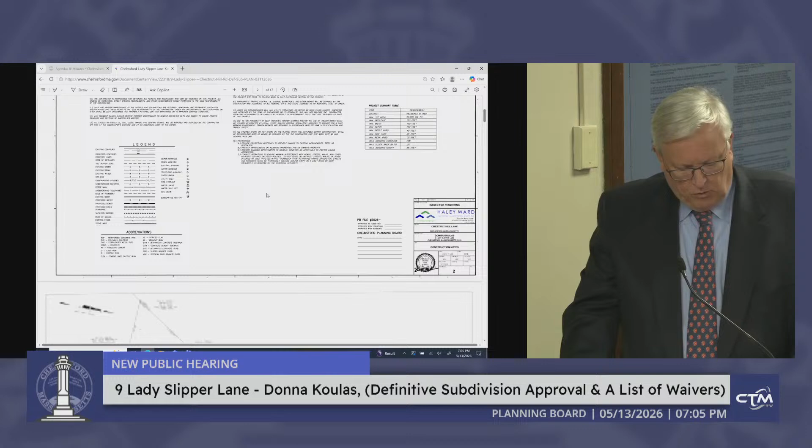You'll probably see from the plans put up on the screen as we go through, this subdivision, the two lots meet, and the proposed houses will meet all of the setback requirements, all the dimensional requirements of the zoning bylaw. So frontage, front yard setback, rear, side yards, height, floor area ratio, all of these are satisfied. So far, so good. This is pretty much a vanilla subdivision, to be honest.

Each lot's going to be served by a septic system. Tests have been done. Brian Malisi, who's the project engineer, can address some of those issues when he comes to speak. I also have Anthony G. here, who is our wetland scientist with Goddard, and he has coordinated all the efforts associated with the Concom hearings and findings that they need to make.

We are not seeking any special permits, so it's a rather limited list of waivers that we're seeking, most of which deal with the street. Basically, elimination of curbs, elimination of sidewalks, reduced width to 22 feet for Chestnut Hill Lane, given that there are only going to be two homes, really two homes and an ADU, that are going to be using that lane on a consistent basis. It's as rural a road as you could possibly imagine.

We had already spoken with or obtained feedback from some of the safety departments. My understanding, police has not sent a letter in yet, but we're not anticipating any kind of issues there. The fire department, we did expect and did receive a letter for their comments, and they are supportive of the gravel road approach as long as it meets their load requirements, which they say it does. So that's another benefit. The gravel road's going to be the better choice in this instance, because you'll hear a lot of people being concerned about drainage, and the gravel road allows for natural drainage versus an impervious area. So we're dealing with two lots, 900 linear feet. I just ask that you keep that in mind.

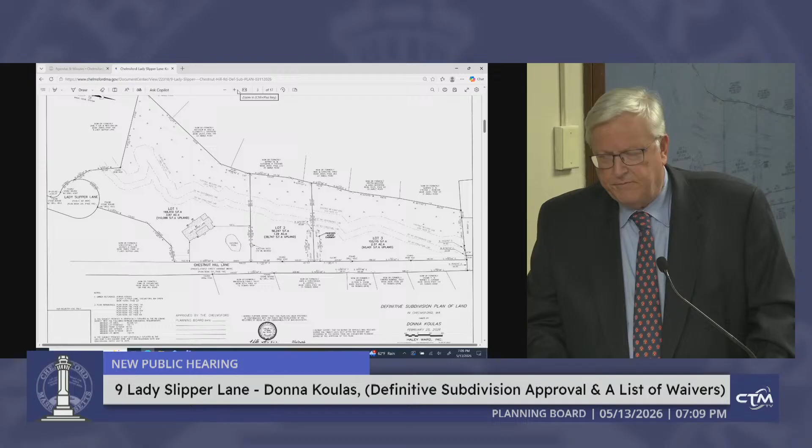That homeowners trust will certainly address the issues of any of the fire department's concerns or police department as well, because it's common that a homeowners association does just that. It makes sure things are safe. You'll see on the plans there's a proposed T turnaround that the fire department will be using, and they found that to be more than acceptable given the width of it.

We're not suggesting that Chestnut Hill Lane become a full street, meaning a thoroughfare from one end of Cantor all the way out to Pine Hill Road. The reason is we don't want it to become a cut-through. It just wouldn't be safe, especially when you get out to Pine Hill Road. Your sight distances vanish, literally, when you're coming out. If you were looking left or right, you could have a serious problem. So by doing that—yes, I'm sorry.

So can you just show me on the map where this is? I think I know where Pine Hill is—Pine Hill's way down here. So Chestnut Hill Lane starts at Cantor, goes all the way through, continues, and would wiggle its way out to Pine Hill Road. In fact, there's a fence there now. So where's the gravel road going to be? This was just being highlighted. So by doing it this way, we have basically a dead end with a T turnaround. So you're going to have a dead end there. Exactly, we're not going to improve it past that. For safety reasons, it makes the most sense. Okay, thank you for orienting me, because I was thinking a totally different direction.

Let me keep going through here. The Draft Homeowners Association probably should not have to address sidewalks. I hope you wouldn't ask for a sidewalk on a 2-lot subdivision. Anything's possible, but I hope not.

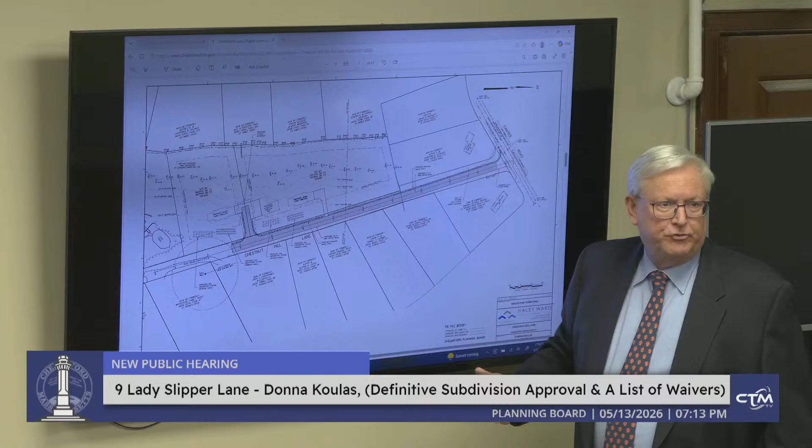One of the questions was, does the applicant have the right to use the entire length of Chestnut Hill Lane? Because one of the abutters made a comment saying, well, you don't own this apron. That's true, we do not own the apron. We own from my client's property line to the midpoint of this, because it's a paper street essentially. That's in terms of actual fee ownership.

But the right to use this entire length, not just here, but all the way through, everybody that abuts that has the right to use it. There's no question about it under Massachusetts law. That's the whole purpose. It's all addressed in the derelict fee statute. I've cited it, I've given you the case law on that. I think most of you are very familiar with that already from prior hearings.

But I want to make it clear that we have the right not only to use that for access and for frontage, but under the case law I've submitted, we have the right to install all the utilities through it, electric, gas, cable, water, you name it. We can do all that.

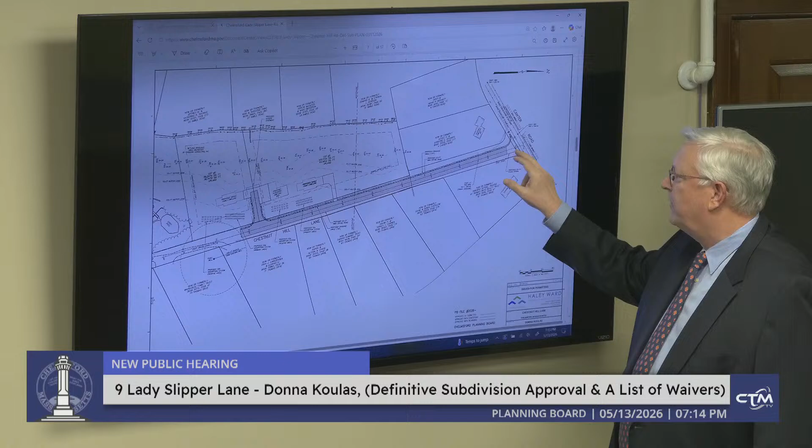And it goes even further, because one person has expressed concern that they own a tree that's somewhere between Cantor and here, somewhere in the middle of this lane. Under the case law, if the tree is in the lane, it really belongs to everybody, and we have the right to remove it because it's defeating the purpose of what that lane is.

The lane is designed for passage. It's not designed to grow trees. So under the case law, we have a right to cut shrubs, trees, plants, anything that's in there, if we're improving it for purposes of using it as access, which everybody can use along that way. And I've cited the case law on that. It's a Shapiro case from 1987.

So we have the right to use it for travel rights. We have the right to basically use it, anything in common for access and travel. We are allowed to build anything within that particular lane as long as it's not a permanent structure on top of it that prevents anybody else from using it. We're just making it better. And there's a presumption to that effect.

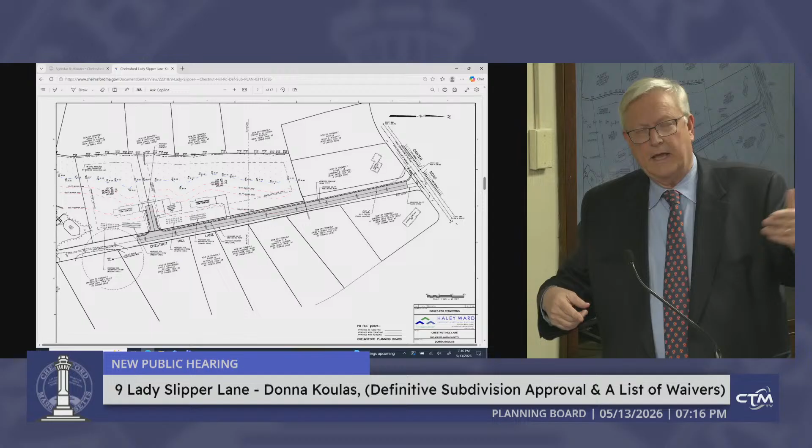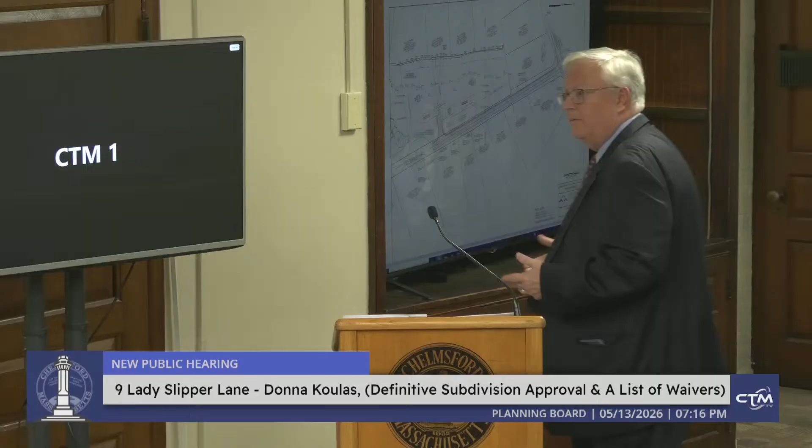Some people wanted to know, do we have the legal right to rely on this road for access? The case law says the subdivision plans approved by previous boards in Chelmsford, starting in 1950, then 1999, then 2001 or 2002, there are at least 3 subdivision plans of record, and all of them define my client's property rights by defining the western boundary of Chestnut Hill Lane. That is actually in the deed description. So because of that, it's an easement by implication, it's automatic. It's not gray, it's black and white, which is great. It makes life easier for all of us.

Anyone has the right to use the private way and make reasonable repairs and improvements. I've cited the case law on that. Such reasonable repairs include paving the easement and other improvements consistent with principles of safety, and that's exactly what we're talking about. Clearing limbs from a roadway, smoothing the surface, placing gravel, or even paving a road have all been deemed reasonable repairs necessary for the enjoyment of the easement. So we have the right to do that, based on a 1981 case called Glenn versus Poole.

The installation of septic systems has been deemed permissible pursuant to the statute as well. There are 2 theories: we have an easement by estoppel or an easement by implication. Either way, we have the right to use the land. My clients don't have to own the entirety of the land, of the lane.

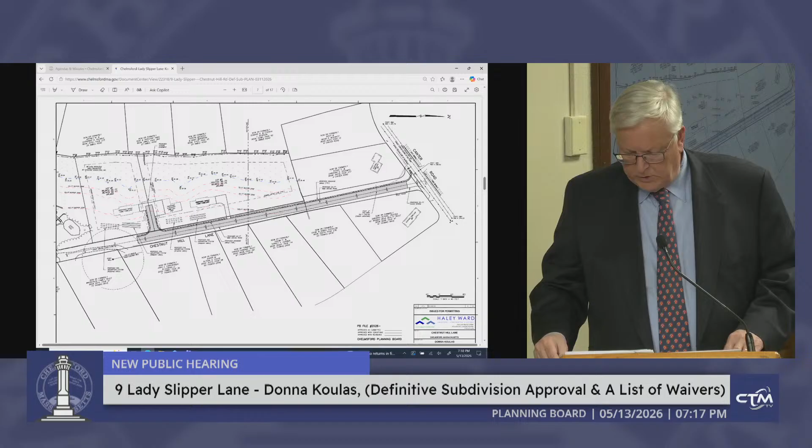Some people were concerned about traffic. Respectfully, not making it a throughway should solve that problem, and that's what we've always proposed. The source deed goes from 1950, from Mr. Sheehan to Charles Koulas, Donna's father, and that property has been further subdivided over the years. Lady Slipper Lane's entire subdivision was part of this original tract.

Some people were concerned about the width of the proposed roadways. The fire department has already addressed this and says they believe what's being proposed is more than adequate. They just want to make sure that whatever type of gravel road we put in meets the fire department specs, which we can. Brian can address that more particularly.

I could be wrong, but I think this is relatively straightforward. I'm not going to get into vernal pool theories or any Concom issues. That discussion belongs at Concom, not before this board, in my opinion. I'll refrain from getting into that too deeply.

I think we're going to have established that we meet all the criteria for a subdivision plan. The waivers are very minimal. I think there's going to be some discussion by your board about the use of gravel.

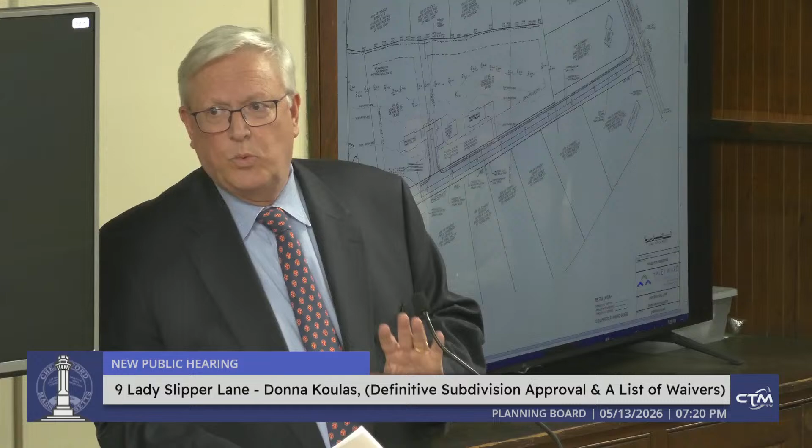We're going to be happy to address any concerns you have. I'd like to ask Brian Malisi to address the technical components of the plan, and then Anthony can be here to answer any questions you have about wetland issues that might come up during conversation with the abutters. Brian?

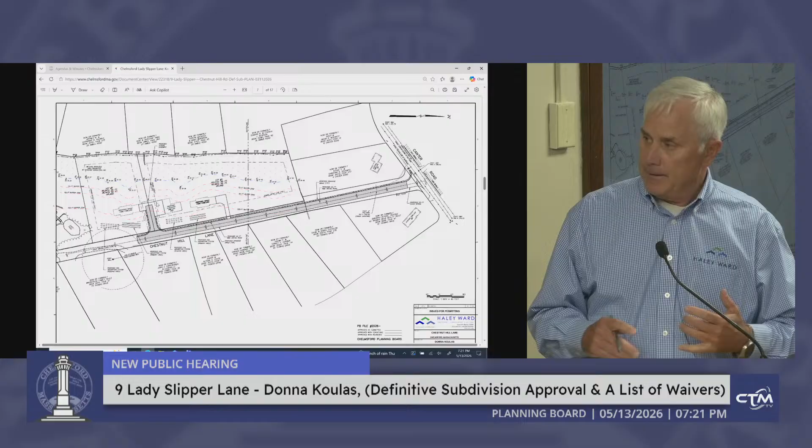I believe the sewer moratorium is still in place in the town of Chelmsford, so these lots will have to be serviced by on-site septic systems. We did perform the soil testing required for the septic systems a little while ago. The testing was witnessed by an agent of the Board of Health, so it was all done on the up and up, and we showed the locations of the testing. The results of the testing are on the plans in one of the back sheets. We also showed the layout of the systems.

I think I read a comment where the 4 septic systems are going to cause all sorts of effluent problems. What I did want to show is the primary area and the reserve area. Title V requires us to show a reserve area. That area does not get constructed until the primary area were to fail or something were to go wrong, but we need to show that the lots can accommodate a reserve area.

Within that roadway, we're going to bring electric, we're going to bring gas. Everything will be below grade. There won't be any poles around.

The proposed stormwater system that we've provided for the gravel roadway utilizes one of the low-impact development techniques that are floated around in the town of Chelmsford. It's a gravel roadway, which reduces the amount of impervious area. It still needs to be a wearing surface that the fire department can travel on, emergency vehicles as well as the vehicles that are going to be serviced, going to and from the homes.

I forget the number right off the top of my head, but it's within the fire department comment letter that it just needs to have a bearing capacity of X amount in order to accommodate their largest or heaviest vehicle. Again, during the construction of the roadway, that can be fairly simply ascertained with some compaction testing. During that, reports can be given to the town, the fire department, whoever else would like to see that.

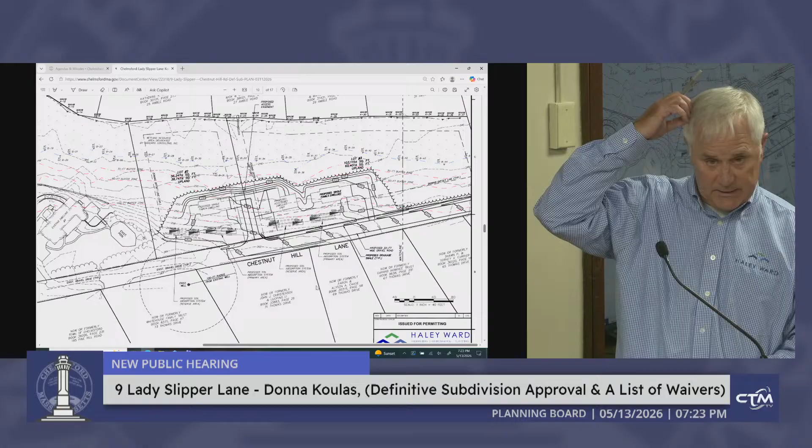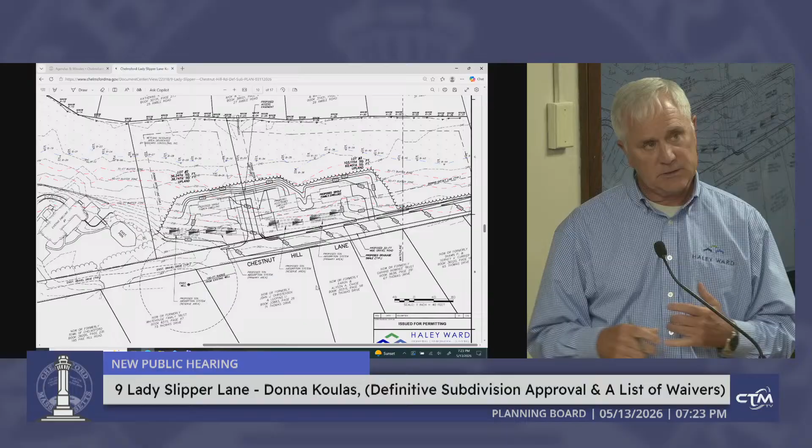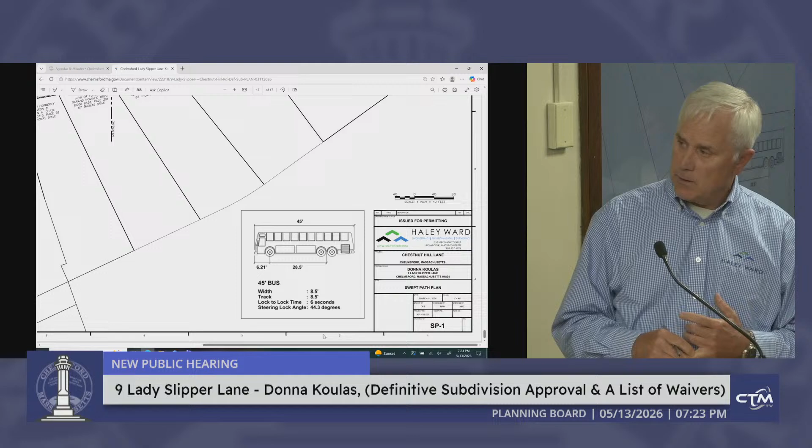I think the counsel said that we terminate the roadway with a T turnaround. The dimensions of that T turnaround are as prescribed in the subdivision regulations. I think the very last sheet of the subdivision plans, we show a swept path plan. You guys are very familiar with those. The fire department typically asks for one on every single project. We show how he gets in and out of Canter Road, as well as turns around using that T turnaround.

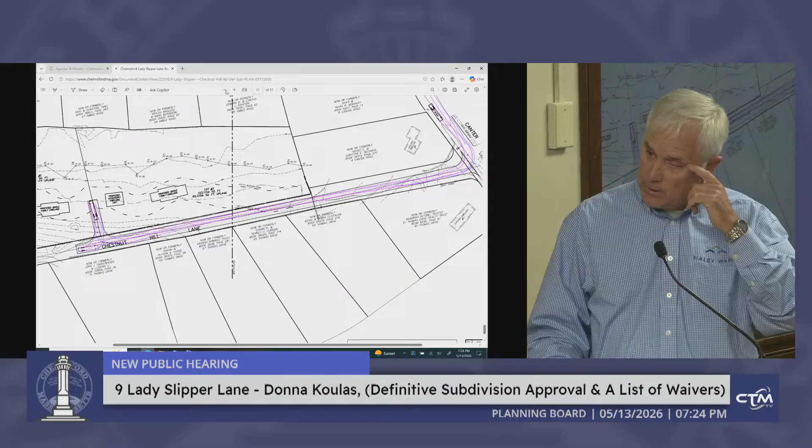I should add that we do have a paved apron coming off of Canter Road, just as vehicles such as a fire truck, if they're going to make those maneuvers, we just want a little bit more of a wearing surface there.

It's not on these plans quite yet. We have a whole host of revisions that we're going to be making, not just after input received from you guys this evening, but from the Conservation Commission. One of the things that we're bandying about is providing a paver, pervious paver type of driveway for both the driveways to the houses as well as the turnaround to provide a little bit more of a wearing surface, but not constitute a complete paved way that would add impervious area to this.

So for the stormwater, if you notice some of the grading plans and some of the details, the grading of the roadway is what we call super elevated, which is just pitched to one side, such that the stormwater runoff from the roadway will pitch to the west or to our side of the property and be intercepted by an infiltration trench in order to intercept that stormwater runoff and infiltrate it back into the ground.

We did provide a profile of the proposed roadway. We try to stay very, very close to the existing roadway in order to not create any large cuts and fills and have a lot of earthwork that has to be entertained for the roadway itself.

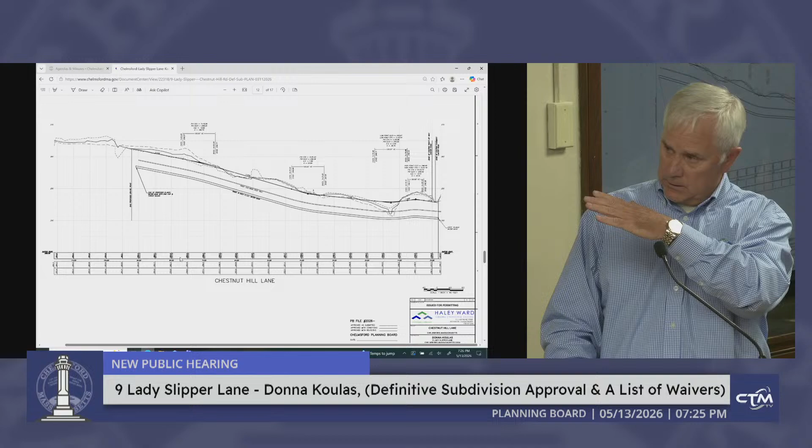From a cut and fill analysis, for the roadway itself, we have 330 yards of cut, so that's fairly minor. There's a little bit more material that needs to be imported into the site for the development of the two lots. They are on a slope, and once we put the septic systems in, put the foundations in, there is going to be some material required to kind of grade the lots and make them habitable.

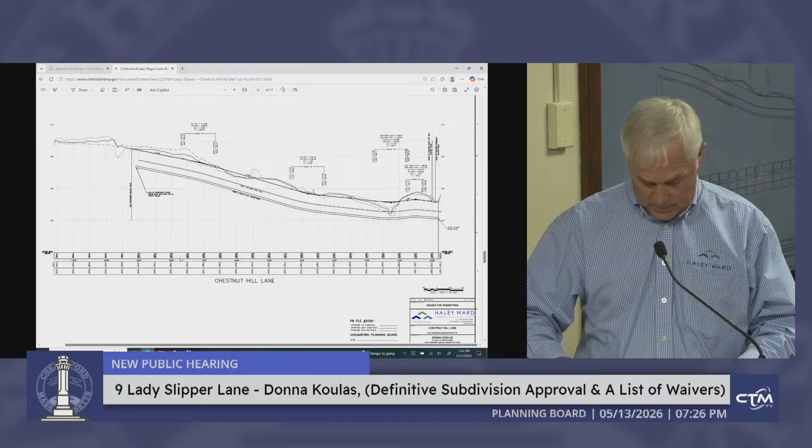I know this is not a Conservation Commission meeting, but you'll see on the plans where the wetlands are located and the appropriate buffer zones from that. One of the reasons for the lot cut up and house placements is to meet Conservation Commission criteria of staying out of the 30-foot no-touch zone, keeping structures at least a minimum of 50 feet away from those wetlands, and the septic systems 100 feet away.

So that's where the placement of the houses came from. We put in desirable footprints for the two lots. We wanted to show a real grading plan, both to this board and the Conservation Commission, to get an idea of what would be going on.

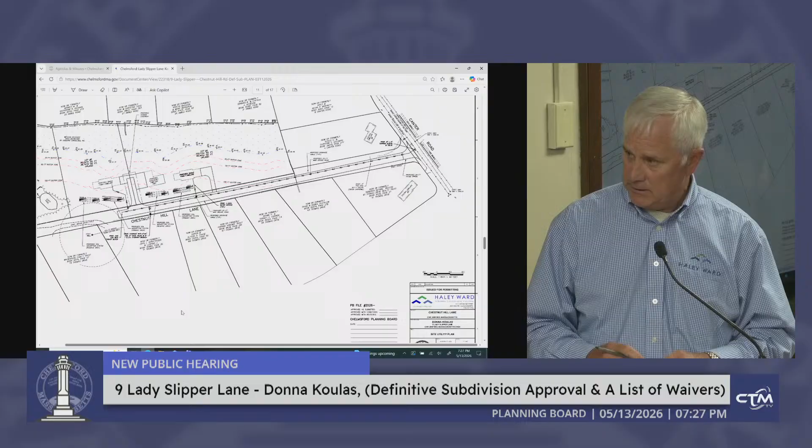I can dive into septic system design, I love that kind of stuff, but you guys probably don't want to hear that. I will say both houses currently are either going to be 3 or 4 bedroom homes. However, we've designed the systems for 5 bedrooms, mostly because of the ADU. The ADU has the right to tie into the proposed septic system, and it'll accommodate that extra bedroom. So these septic systems will be fully compliant.

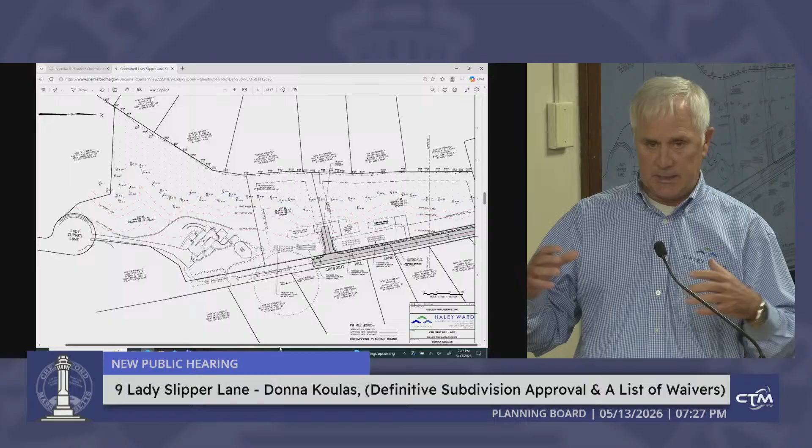Again, following some of the input from this board and from the Conservation Commission, we're ready to pull those designs and submit them to the Board of Health. We have not done that yet, just in case anything gets revised and twisted around. But there's that hierarchy of submittals and permitting. I know I was probably very quick and probably forgot a few things, but I'm sure it'll be flushed out during questions. Thank you for your time.

I'll just wait. If the board has any questions for me, I'm here to answer them. Considering it's not a Conservation Commission hearing, I'll leave it to you guys if you have any questions related to wetlands. Okay, thank you.

All right, Marcy, we have department letters. Sure. All right, so our first one is from the Board of Health.

Dear members of the Planning Board, this letter is submitted in reference to the proposed development project located at 9 Lady Slipper Lane. The applicant is requesting approval for a 3-lot definitive subdivision, which proposes the establishment of a private way to serve 2 newly created single-family residential lots. One of the proposed lots would also include an accessory dwelling unit. If the proposed development is unable to connect to town sanitary sewer systems, the development would necessitate the installation of on-site septic systems. Any such system must be designed and constructed in full compliance with the requirements of Title V of the State Environmental Code pursuant to 310 CMR 15 and successfully complete the Department of Health's application review and inspection process. Respectfully submitted, Donna Greenwood.

We have one from the Chelmsford Water District. Dear members of the Planning Board, the Chelmsford Water District has no concerns with the proposed project at the location. If this project is approved, a representative should contact the district to obtain our rules and regulations, as well as our specifications and fees. Sincerely, Brendan Cantor.

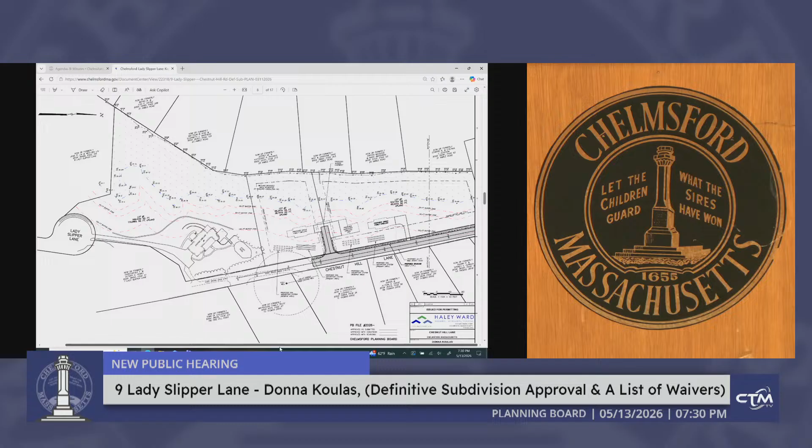This one is from the Department of Public Works, from Sheila Joyce. It says the engineering department has performed a review of the definitive subdivision application submitted by the applicant. The submissions were reviewed for appropriateness and method of accuracy, as well as for compliance with the Town of Chelmsford's Stormwater Bylaw, Town of Chelmsford Stormwater Management Regulation, and Division 3 Sewer Capacity and Connections Restrictions. The attached documents entitled 9 Lady Slipper Lane, Chestnut Hill Road Definitive Subdivision Application Packet, the engineering plans entitled Definitive Subdivision Plans for Chestnut Hill Lane in Chelmsford, Mass., March of 2026, and the attached 9 Lady Slipper Lane, Chestnut Hill Road Definitive Subdivision Waiver Requested were reviewed. Clarification is requested by the DPW regarding ownership and rights of the private paper street, Chestnut Hill Lane. Site plan review shows outstanding DPW engineering issues that were not addressed.

Applicant to confirm HOA and procedures for trash disposal and pickup. If applicable, provisions for the enclosed dumpster pad and dumpster should be depicted upon the plan set. Long-term and perpetual care of the dumpster, including emptying and enclosure, will be the responsibility of the property owner. Locations and procedures for snow storage and plowing of Chestnut Hill Lane should be depicted on the plans.

During construction, care should be taken to maintain separation of at least 10 feet horizontally from the edge of the sewer services to the edge of the water services. Where a horizontal separation of 10 feet is not practical, both services can be installed closer to each other, but the water service must be 18 inches higher than the sewer services per DEP standards. See Massachusetts Water Laws, Chapter 9, Section 9.8.

All existing and/or proposed utilities should be clearly and accurately labeled with size, materials, existing and proposed rims, inverts, etc. on the drawings, reflecting the most updated utility connections and sizing. Confirm location of the proposed 1-inch water service to the accessory dwelling unit. Cut and fill calculations shall be submitted for review.

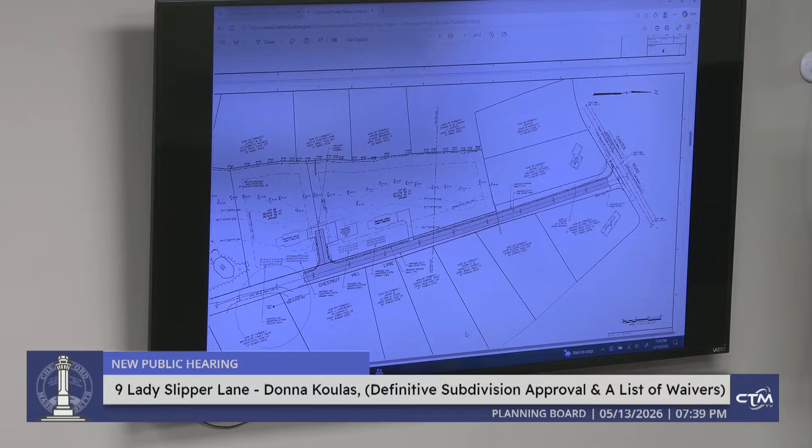Joel? Yeah, sort of along that same line, so this paper road, which is between Cantor and Pine Hill Road - yes, understand - and that when you look at the GIS, it shows a gravel driveway. It looks like some sort of use of that paper road up to about the point where it's indicated on the map, where on the left, it makes some reference to a gravel road or something like that. So if that's accessible right now, then the only thing that makes it inaccessible is the fact that what you're planning to turn into road, because that's the part that's wooded and stuff that has to be cleared out, is what I understood you to be saying.

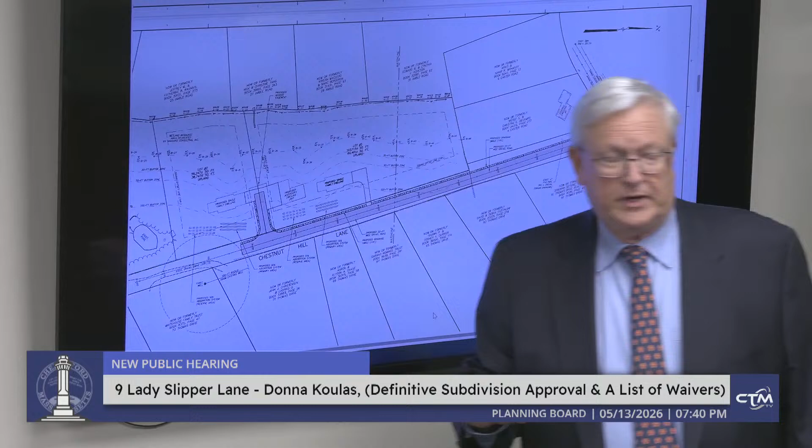It's totally unimproved right now. Yeah, it's completely unimproved, so it's impassable right now. And this road that continues all the way out is not in particularly great shape. My recollection, and I can be corrected by others, but the only one that I am aware used that on a routine manner was Mr. Parley, when he originally owned this.

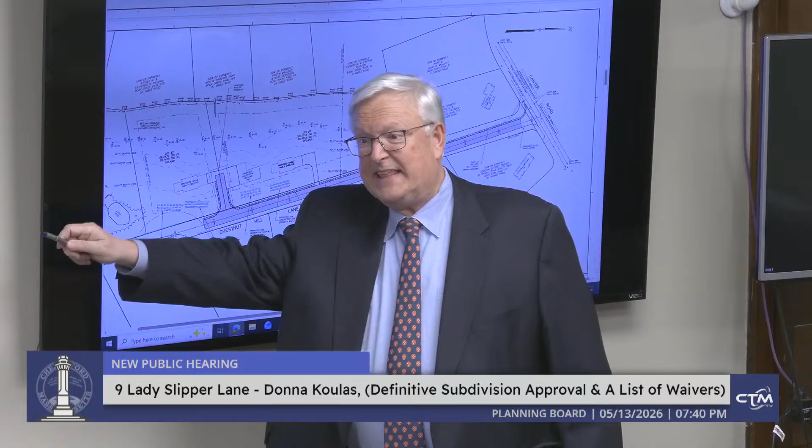There was a dispute back in 1999 which I was involved in. He was using this to retain his rights. But to my knowledge, it's very rare that anybody comes through, and I think there's a gate at the end out on Pine Hill Road that prevents people from going all the way through.

So it's not a throughway whatsoever. Right, although technically somebody could remove it if they wanted access at the other end. Yeah, well, so any one of the people could want to develop it. Okay, but one of the questions I have is...

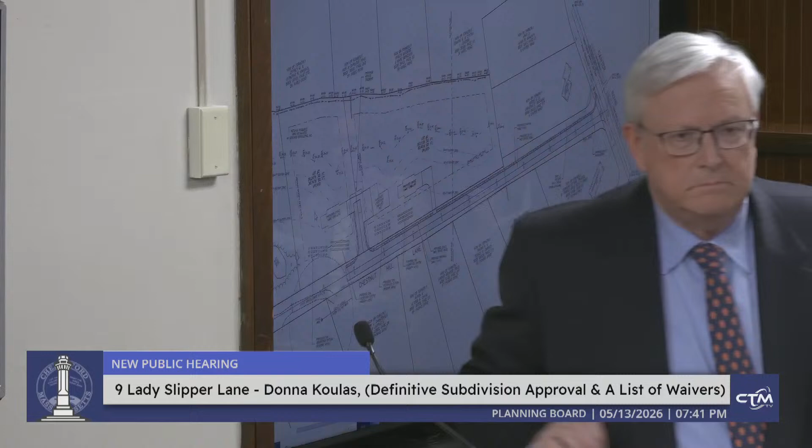So we're subdividing, we're creating 2 new lots, correct? So on one lot there is a principal dwelling unit, that's lot 2. This is the existing 9 Lady Slipper Lane, the existing dwelling with a long driveway in. This is all the one lot. So now we're creating this lot and that lot, correct, the 2 houses with the accessory dwelling.

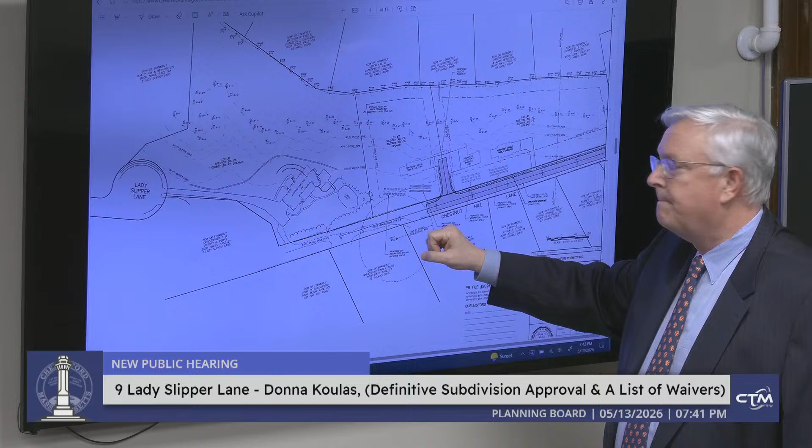So lot 2, does that have a principal dwelling unit proposed to be developed on it? Yes, this will be it. So there is a principal dwelling unit proposed for lot 2. So theoretically, one could add an ADU to that under the current law, correct? Sure, it could.

Then lot 3 is where the ADU is being proposed. So the ADU is being proposed on that lot, but they share a common drive. And that is the principal dwelling unit for that lot, and then there's the ADU, and the principal dwelling unit for that other lot is that one there.

Doesn't the ADU have to share the driveway that goes down to this street? This will be the road and that'll be the driveway for the T turnaround, allowing entry into this house or to the ADU. This will have its own drive. Well, that's what I was just going to get at.

Aren't ADUs supposed to share the driveway of the principal dwelling unit on the lot on which it's located? Yes, and it will. No, it's going to share the driveway with lot 2. Oh, I see what you're saying. You're saying should it have its own? It should be sharing the driveway with lot 3. With lot 3, I understand. Yeah, okay.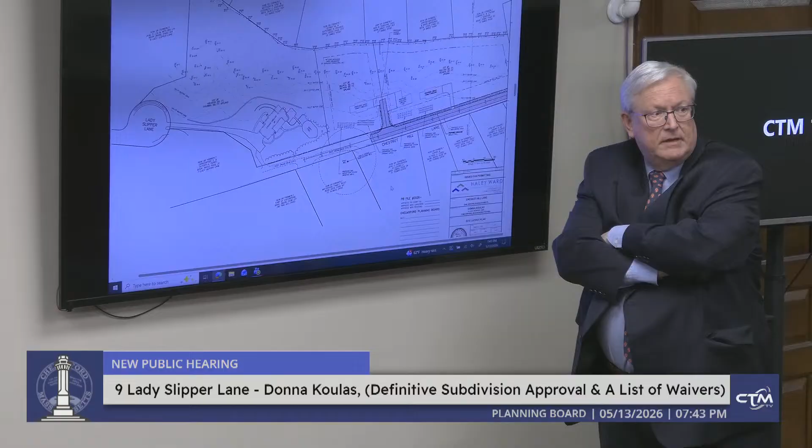You're not adding any curb cuts that would affect it, just move that driveway into the middle. We could, I just don't think that would be the best idea, but it's something to look at. Because there are technically 2 curb cuts on that property, on that lot with the ADU. Yeah, it's just a matter of shifting it.

We're not looking to play games with it, we're just looking to find what's going to be the most appropriate location for the driveway.

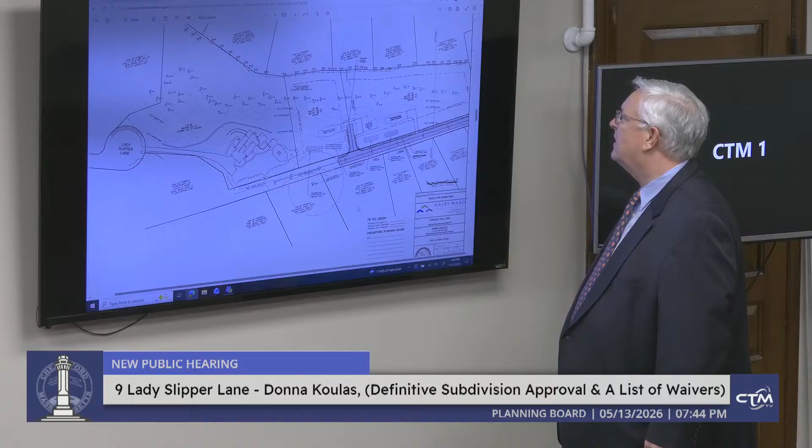And then lot 3 is sufficiently sized that theoretically, not that you're proposing it as part of this, but theoretically that could be subdivided to create 2 legal lots as well, is that not true, because it's over 2 acres? It's over 2 acres, but there are wetlands. I don't think it could, but you could draw lines to do all kinds of stuff. If we could get more lots, we'd try.

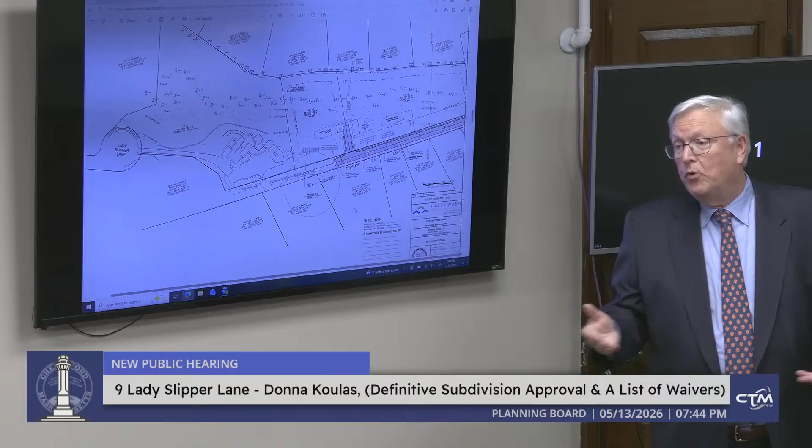So my question is about the drainage. It sounds like there is drainage planned, but that was not submitted to the DPW. Is there a reason? Nope, we will follow up with all that information. What we were trying to ascertain was really some of the waivers on the roadway and the surface. Obviously if we have a paved roadway it's going to require a lot more drainage infrastructure. We didn't skirt that issue, but we wanted to open up the hearing and get some input from the board to find out which way we were going to go.

Okay, so based on the elevations you are proposing for the road, looking at the contours on the GIS, it generally seems that the land is sloping downward along the proposed paper road towards Cantor. That seems to be sort of equally distributed along both.

So my concern is that a lot of that's currently vegetated, and essentially what you're gonna be doing is removing a lot of the natural uptake, instead creating a situation where you're introducing potentially a lot more water flowing than there was before. There's a couple of concerns I have with that.

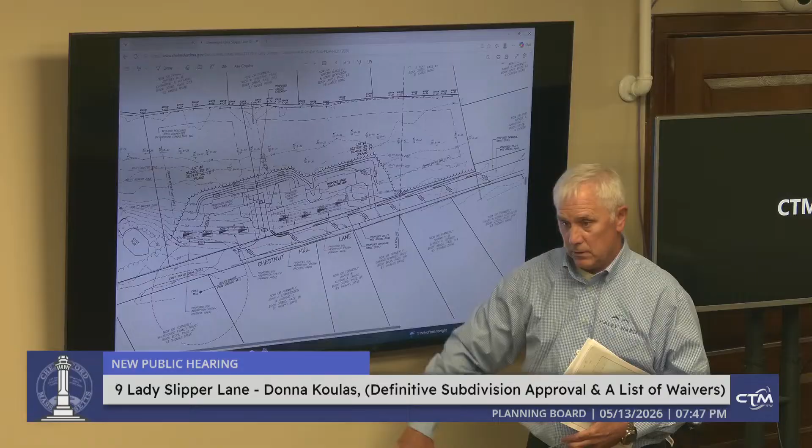If I may, there's a ridge line right around here. Flows this way, and a lot of this flows this way back down to Thomas Drive. Thomas Drive, which is over here, sits a lot lower than this - it's kind of a ridge. And so, to answer your question, I had said before we're kind of trying to super elevate the roadway here so as not to pocket water and affect any of these neighbors at all. I will explain that a lot better.

Yeah, I would like to see that explained a little bit more carefully. Sure. So I assume then that you'll be submitting a stormwater analysis - okay, that answers that.

Now, the question of septic - I was at the Board of Health meeting last night, Monday night, and they were under the impression that this was gonna be town sewer. I don't know how they got that impression, but they were then expressing concern about the fact that it would be before us as being on town sewer, but then be septic, and that they wouldn't have had a chance to weigh in on, especially the placement of the septic, so that we would know that the placement of these buildings is reasonable given the septic. So I'm sure you're aware of the issue, so I guess my question would be...

Well, first of all, I understand subdivision, we have a 30-day window with Board of Health. But I would like to be able to have some confirmation from Board of Health that these proposed locations actually are locations that will work.

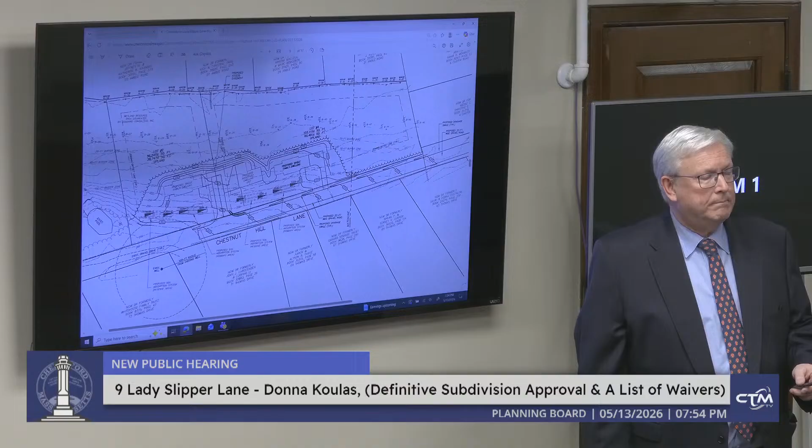It would also block the fire trucks from going down. No, they can't, that's the point. Why? Because you're not allowed to block, that's the whole purpose. They can't park on the side of the road? No, they can't, and there's going to be signage for that. Okay, we'll come back to it, but I have additional questions about impeding access. You can't, one abutter can't impede the access of another. That's the whole purpose. But okay, then how is this project not impeding their access to their property with the roadway, the way you're proposing to make the changes to it?

It's only improving it, it's not impeding their access to their property. No, I'm not, you're keeping it high on that side. How are they gonna access their property with their rights? They can access it through their own property.

They want to build a ramp up into this, God bless them, they have the right to do that, they've had the right to do that for decades. No one's going to do it as a practical matter. They have frontage on Thomas, they're all gonna go through Thomas. That's what they've done historically.

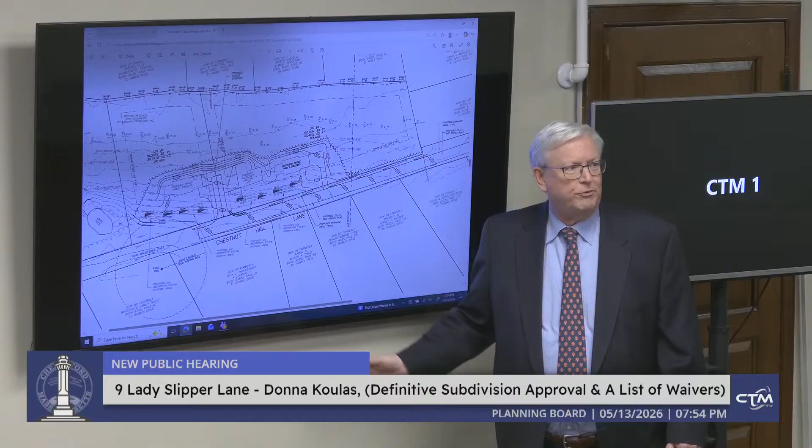This area is significantly lower. No one's gonna try to climb the hill to get up to this road. What if they wanna get to the back of their property and do some work? We'll hear that from the abutters. If they wanna do that, I don't think you're gonna get anywhere with it. We can move on.

My only concern is the width. I would like it to be a little bit bigger.

Deirdre, can you just refresh me, the driveway for the two homes, are they gonna be permeable or impermeable? We'd like them to be, John, you want to explain this, Brian? It's pervious. I don't know if you were on the board at the time when Bob McCrensky built the building at 28 North Road.

And that driveway is a type of material that is, I call it mostly pervious. It allows the water to drain through, and it's the actual entranceway into the parking lot area. He used a lot of that, it's the same concept being used. So it lessens the amount of impervious substantially, and it allows for natural drainage. I hope that answers your question.

I'm gonna go check out that 28 North. Yeah, it's the yellow Wentworth building, that's what it's designed after in Cambridge. That's where that design came from.

Marcy, well, Joe brought up one of the points that I was concerned with, the driveways for the ADU being on property 2 versus property 3. And I think with the Board of Health questions, like when we talked about the septic system, I wasn't seeing where they're planned or proposed on this. Am I missing it? I could be, but I've been over this half a dozen times.

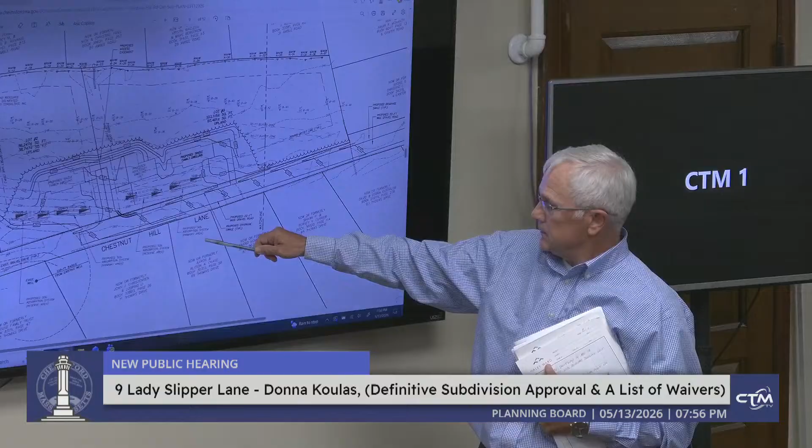This area here is labeled, proposed soil absorption system primary, proposed reserve, proposed primary, proposed reserve. And those big boxes, those are the test pits that we actually perform. And again, I think on one of the later sheets, the results of those test pits were around those. Yeah, I remember seeing those, but it was, all right.

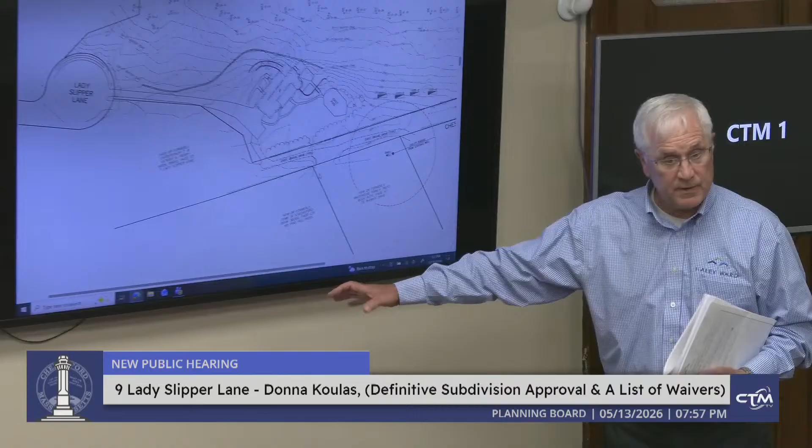Brian, could you address the issue about the homeowners to the east side of Chestnut Hill Lane using that as a road? Why they probably would not be doing that? If they wanted to, they can, obviously. Yeah, I mean, they certainly could. I mean, most of these houses, most of these lots are developed, they're off of Thomas Drive. I guess I don't know really the answer to that question. If they wanted to carve a path through there, they certainly could bring their vehicle up that way.

Again, I think I tried to explain, I probably didn't do a very good job, at the grading of the Chestnut Hill Lane we're trying to stay very, very close to the existing grade such that we don't have any large cuts or large fills that would create a real ditch one way or the other, so.

I don't think we would impede their access. No, they would have to develop their own plan to demonstrate that it meets all the criteria. So stormwater that would be created, runoff, et cetera, that wouldn't be the applicant's obligation, that would be theirs, because they're the ones that are seeking to tap into, to use that road. They have the legal right to do it, though, absolutely.

One septic per house, correct, not per dwelling. The ADU is tied into one of them. Got it, okay, thank you.

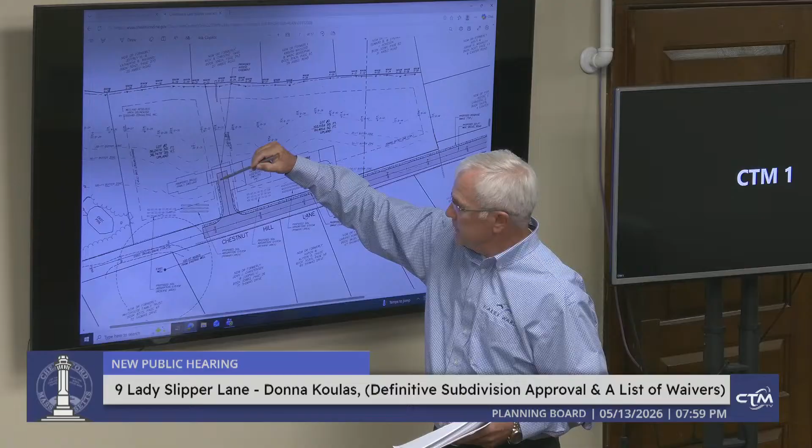And where would the driveways of lot 2 and 3 be? Like, where do they park their cars? I get the one on the right, but how about the one on the left? There's garages, and there's room in the garage. So they wouldn't be parking in the T-turnaround zone?

So is that T-turnaround zone a no-parking area? It would have to be for the fire department, yeah. So pretty much the whole Chestnut Hill Lane would have to be no parking, because that's the concern when we talk about the 22 feet. It's a family thing, which is great, and I know that, my parents live right next door to me.

But if you want to have family over for a graduation or a birthday party, where are your guests going to be? Because that seems like you're going to be putting everybody out on Cantor and in the other areas.

So if we want to make this usable, I could agree that it might need to be a little bit more than 22 feet so people can park without impeding on things. I'm not saying it needs to be 40 feet, I think there's some flexibility, but we built these houses meeting really what's been done before with the town for roads like this, which is 22 feet. The width hasn't been an issue in the past here.

Well, some of us live on really tiny streets and from experience can testify that we really wished we hadn't done this in the past. Okay, again, that's all I'm saying.

Marcy, any other questions? No. Saritha? All right, so a couple things I just want to understand a little bit better.

On that 50-foot no-structure build line of the wetlands, I see the outline properties look pretty close to those corners. But how much distance from the rooftop runoff are you going to have in those areas, from the 50-foot no-structure zone on the wetland? It's really a Concom question. You want to answer it? Yeah, I can. I'm still allowed to ask as a Concom member, so thank you.

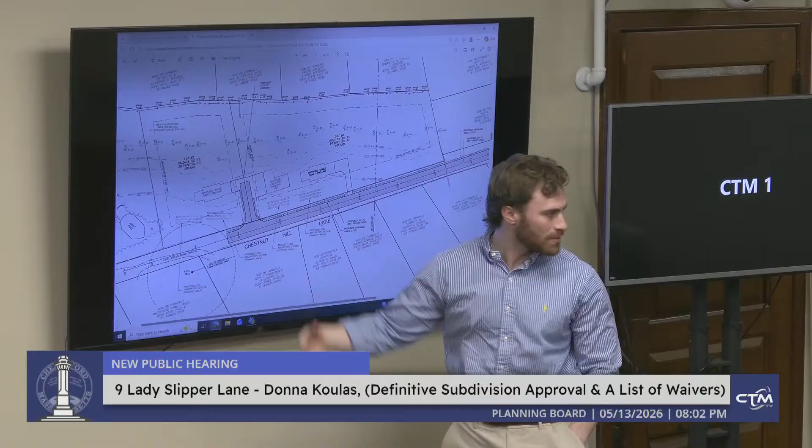So on that note, I'm sure Brian can speak to this - this doesn't include the size of the roofs as well, correct? Yeah, so minimum 50 feet here, maybe 51 feet there. Because they look like they're right abutting up to that 50-foot line.

Yeah, that was a question Concom had - floodplain, but it's outside. And they did peer review the delineations. Okay, and that's what they're waiting on, is that information, or did they get it? I believe they got it. Yeah, okay.

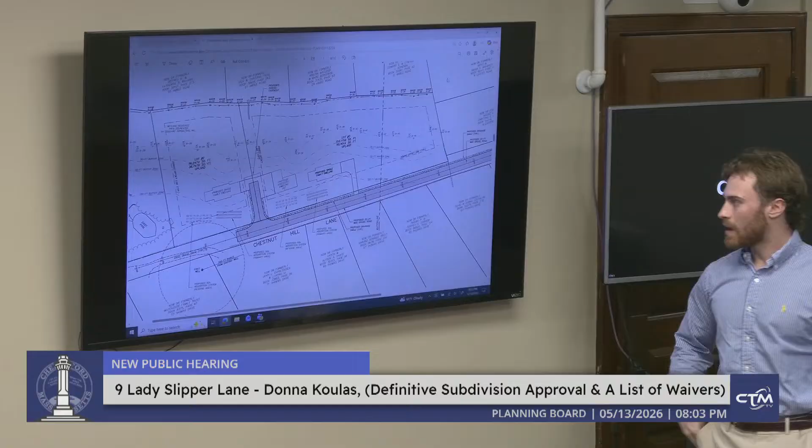I met with Oxbow Associates out there last Monday. We both confirmed that any buffer zone cast onto these two is unaffected from that peer review site delineation walk. So essentially all buffer zones in the line are set in stone from a conservation point of view.

Okay, that was actually going to be my question too, because I knew it was close, and I wanted to figure out if they had settled on where, so the houses wouldn't be moving. Exactly. And if we're being honest, this delineation was a little generous, to give the applicants the most ecologically feasible outcome and the most protection to the down-gradient wetlands as possible.

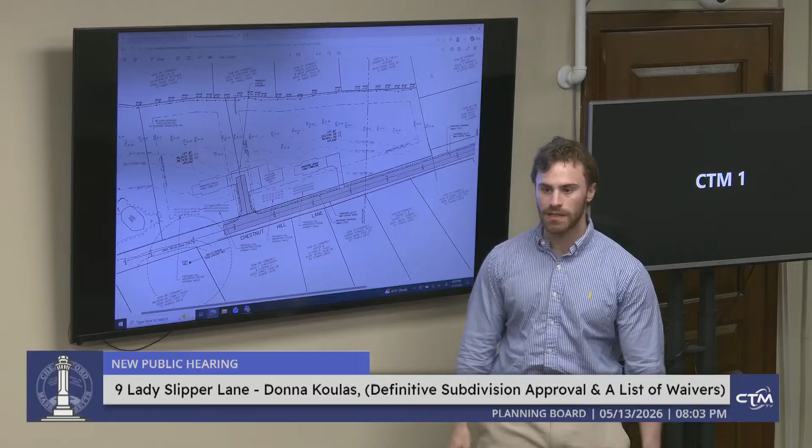Okay, thank you. All right, the next question - I didn't see anything about which trees that exist today would be removed. So we do show a proposed tree line, but we didn't go out and locate every single tree.

Can we, next time you come back, bring the mature trees that are along there? Actually, I think that's what the DPW is asking for too. Oh, they were too? Yeah, in their letter. Cool. So yes, the inventory of tree removal within that right of way. Okay, perfect.

I guess I was wondering too, because this road - it kind of came up with the trash that the health department was asking for. I'm not really clear - I'm assuming this is private, like a paper road, so a trash truck wouldn't go up it, but if you have a dumpster, it would have to go up it to go empty it, right?

No, the trash truck is private pay. They'll go up and get it, then do the T turnaround and drive out. They'll be part of the homeowner association for trash, road, screening of the plants, those kind of things.

Okay, and I'm also looking forward to seeing when you guys do the stormwater stuff - the snow storage, the plowing plan, all that stuff. I'll be interested to see that when you get that done. Sure.

Yeah, and I guess I'm just concerned with the road in general, so can't wait to see when more stuff happens. I'm concerned with the runoff, I'm concerned with the water. The fact is it does affect the abutters, so I just want to see more information on it. I'll be looking forward to that stormwater and other info. So, stormwater perspective, okay.

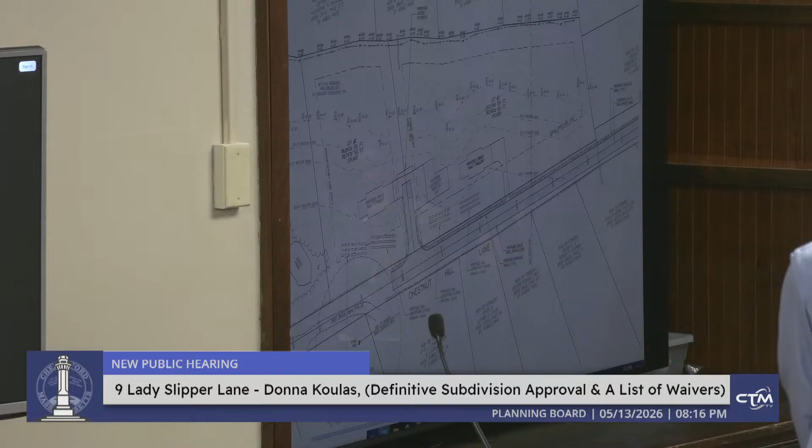One of the discussions you just closed on had to do with the Conservation Commission's request for a delineation independent review. I'm not sure if it's out of form to rely on the attorney and agents to represent an independent party's review with statements of fact, some of which I'd like to address, if you don't mind. There was a question, I think, directed to Anthony - you can address the board, sir, I'd appreciate that. I just wanted to make sure I understood who I was referring to.

I think there was a question from Ms. Tonini about the screening impact on some of the properties, and I think the impact of that was entirely misrepresented. Let me point to my property to help you with that. I live at 71 Thomas Drive, and it's about a 50-foot grade down to Thomas Drive. My home is located at the top of the hill, more or less roughly exactly where you see the printing. We have several trees along the back line, and there is quite a number of trees here in the lane. I assume a number of these trees will be taken out to create the property.

I would assert it's a misrepresentation to suggest otherwise, and I would request that most of these comments be stricken from the record as they pertain to the Conservation Commission report that none of us have read yet - that's a misrepresentation. This home is also here - they're going to have significant lack of screening to the property. The rest of these homes are all down the hill, so they won't see the property.

The final point I'd like to close on is that we respectfully ask the planning board not to approve the subdivision or grant the requested waivers until the entirety of these issues have been settled, including the stormwater and the impacts on the abutters' property. You'll hear from some of them tonight. Thank you very much for your time - appreciate it, thank you.

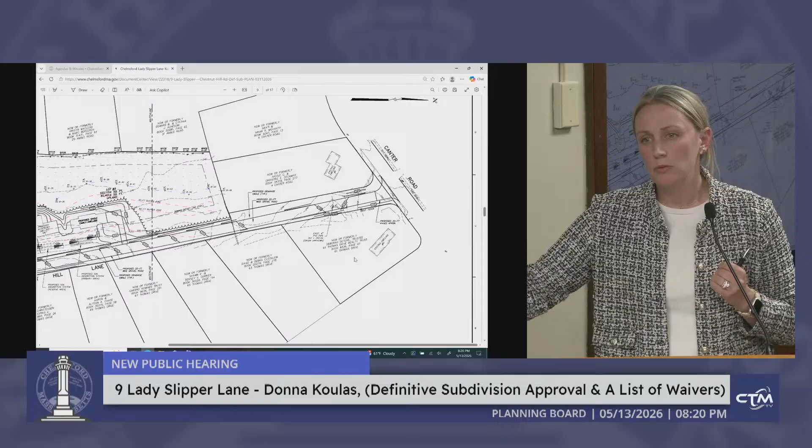I live at 25 Amble Road, in an area we haven't talked a lot about, but is in the immediate downgrade of these new proposed properties right here. I just want to be super clear, I'm not here to argue against the right to build by any means. I do want to ensure that the board has the necessary technical evidence to prove that the development will not result in water trespass or damage to my property. Most of that area, as we know from the wetlands review, is already quite wet, and the downgrade continues on my property, so there's a lot of potential for that flow.

We already covered the DPW memo. There's no stormwater calculations that were submitted. I appreciate the attorney mentioning that they're doing those. I would just ask that, in order to really respect the application process, we need to review these calculations, as well as the missing land disturbance permit for cut and fill, because it would be hard to make a vote or determination on this in a vacuum.

I also heard that on the Conservation Commission review, there were a lot of questions not yet addressed related to whether there are perennial streams. And I heard the engineer mention a whole host of revisions they're proposing. I think it's important that we see those revisions and how they will impact the plan, because we cannot assume the new designs will work. I think that is the applicant's legal burden to prove.

The second point I wanted to touch on, we talked a lot about pervious gravel roads versus impervious. One important thing to touch on is that gravel surfaces are often proposed to be green or friendly, but in reality those gravel roads change over time. We've talked about the importance of O&M plans to make sure that's addressed. But I wanted to specifically request that the board consider requiring a 100-year storm analysis that treats the gravel surfaces as 100% impervious, because in 3 to 5 year periods that percentage can shift to impervious quite quickly. And if the drainage system only works when the gravel is brand new or freshly maintained, then that system is designed potentially to fail and could create a massive runoff problem for my downgrade property and the downgrade properties of my neighbor on the other side.

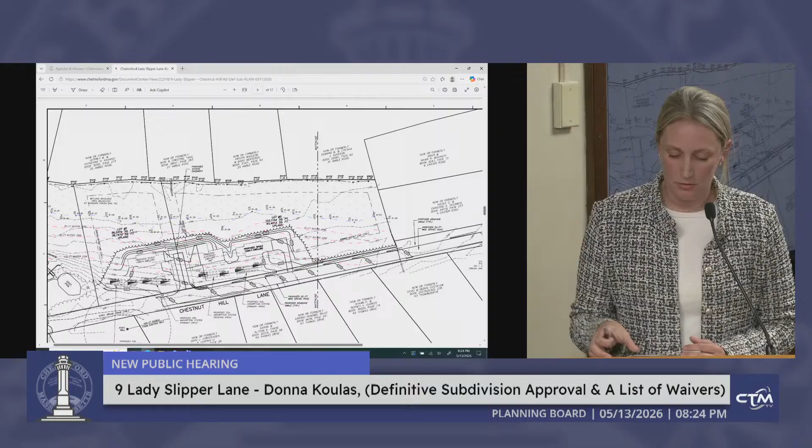And I also really appreciated the town engineer specifically being requested to review that as well. I think often this analysis includes a post-development volume of water, not just rate, which is really critical to ensure that it's not increasing on that property line. I think we're all aligned that we should prioritize the protection of the existing homes and the town infrastructure. And we've had wetter and wetter lands over the last years with the new houses that are developed, and want to make sure that our homes are safe too.

Thank you very much for your time. I appreciate it. Thank you.

Hi, my name is Krista McLeod. I am an abutter on 29 Amble Road. I actually had a question.

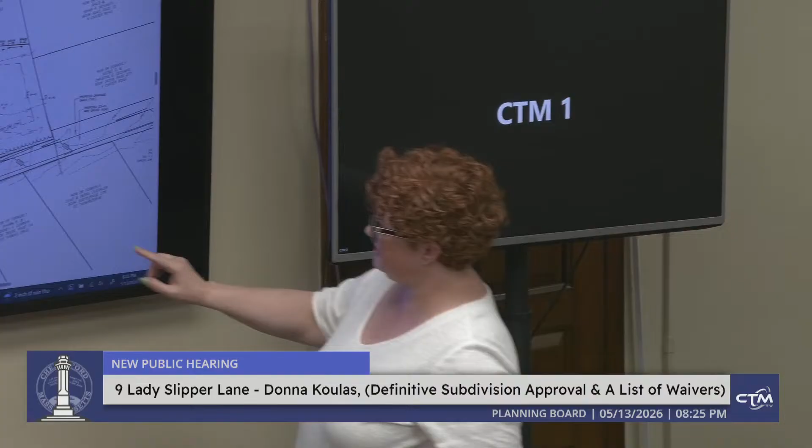All along this road, if you'll notice, those are stone walls. According to research that I've done, and my neighbor Matt King, who also submitted a letter, those stone walls may be as old as 200 years old. So my question is, will those stone walls in any way be impacted by building a road there? Will they have to be removed when the road is being built? The reason I ask is because according to zoning bylaws, one of which was just voted in at town meeting, any project that includes a building or structure over 75 years of age shall be referred to the Chelmsford Historical Commission for review and comment. There has been a lot of recent scholarly interest in these stone walls in New England, as they are unique to our area as archaeological and historical properties to be investigated. So that is my question: I'd like to know if there are any plans to disturb those stone walls when that road is built or improved.

I have another point as well, regarding the Pine Hill Road access. While they've stated that it is not passable, that access right now, the paper road, I would argue it is passable enough that the homeowners in that area have had to block it off with a chain, because they've repeatedly had Amazon drivers and people cutting through when trying to cut through in their vehicles. If you look at Google Maps, it's on there as an unnamed road as of right now. So this paper road runs the risk of becoming a cut-through in the neighborhood if all of those trees down that road are cleared. I just wanted to point that out as well.

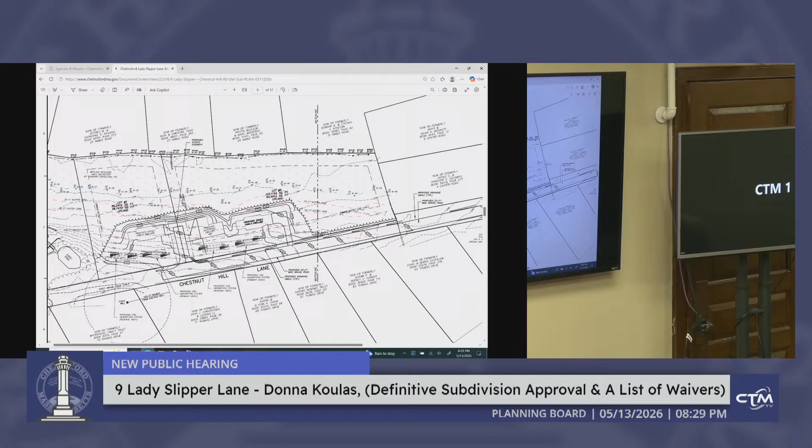Now, you will have heard Attorney Hausler talk on and on about the derelict fee statute and how it grants property rights over half of the fee within the lane that abuts the applicant's property. But it is important to be clear that the derelict fee statute in and of itself contains no language, no provisions that actually conveys easement rights. It is simply an instrument, a law that controls the fee ownership in legal conveyances.

So I want to talk a little bit about the fact that Mr. Hausler's letter is ambiguous with respect to actually defining for you all what is the source of his claim that the applicant's easement covers the entire lane. Nowhere does he clearly explain which theory of easements he is asserting that grants the applicant rights over what I'm calling the terminus of the lane above Canter Road.

Instead, there is an implied argument based on two claims. He implies that an easement by estoppel covers the entire lane on the argument that because all parts of the lane have appeared on any subdivision plan at any time, these are his words in his letter, no one can claim the right does not exist. I want to emphasize for the board that this is a categorically false statement, and I might go as far as to say a disingenuous one, because I suspect that even Mr. Hausler knows that that is simply not true.

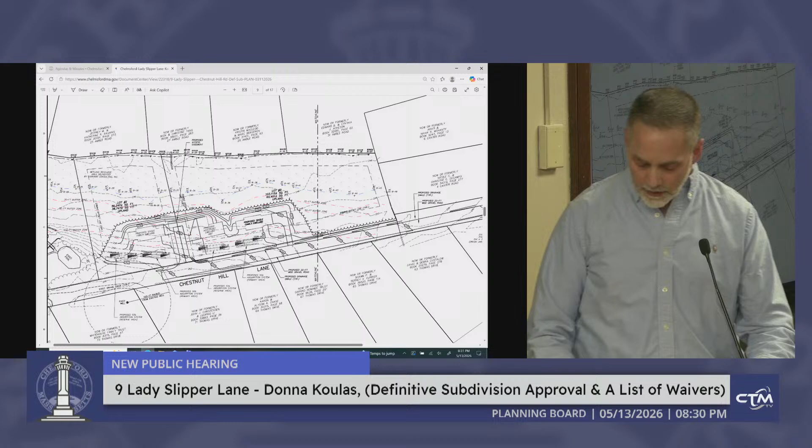Many courts in Massachusetts have repeatedly upheld that estoppel does not apply to everyone, anywhere, at any time. It is a right that runs against grantors only, in favor of their grantees, and not against any outside party. So it is true that the applicant's grantor, Charles Koulas, and anyone who followed him in his chain of title cannot claim that the applicant's easement does not exist.

But as I noted in my letter, estoppel does not in any way legally bind or burden land that is owned outside of parties that have no history of common ownership with Mr. Koulas's chain of title. And therefore, the letter does not address the most central fact: the Canter Road terminus and Lady Slipper Lane have never, at any time in history, as far as I can tell from public records, been owned in unity. They have always been a part of separate chains of title.

There is a fundamental core fact that is so fundamental to law that it exists in Latin. I won't try to pronounce it, but it basically says one cannot grant what one does not own. Mr. Koulas has never owned the Canter Road terminus of this lane, nor has anyone who preceded him in title, and therefore there is no easement that can apply to a part of the lane that no one in the applicant's chain of title have ever owned. It is simply an incontestable, highly upheld tenet of Massachusetts land use law.

So no, the applicant's claim to an easement across the entire lane is simply false. Her easement stops right here. This is what she owns. This is all private property of these three abutters, and no, this easement absolutely does not include this part of the lane.

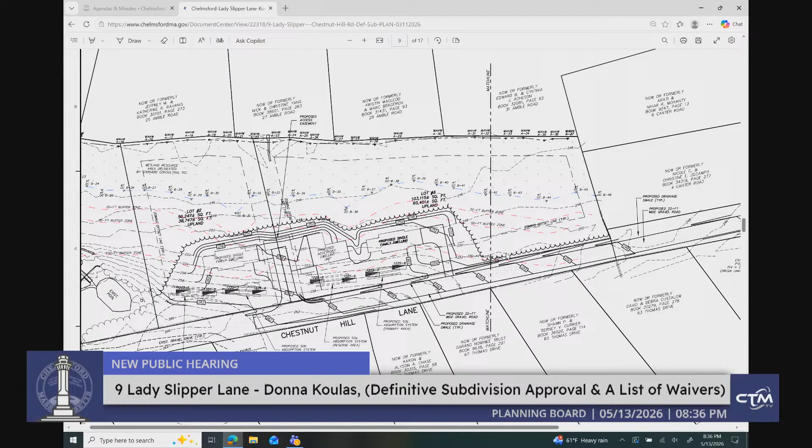The intention, since I've been there almost since I was a child, the intention of the original developer, Hicks, was to leave a forested area in the back of the homes on Thomas Drive, Canter Road, and Amble Road. He wanted to maintain the desirability of those properties. My backyard and the wooded area, which includes the paper street, is designated as a national wildlife habitat. There's a sign back up, and also I have the certificate if you need it.

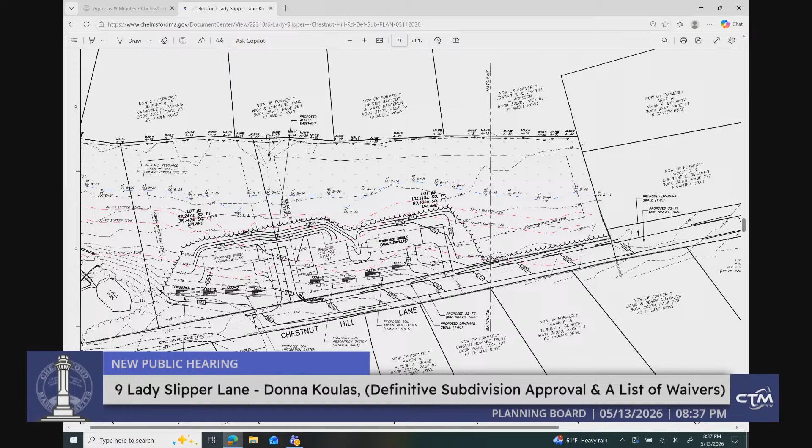The current site conditions already demonstrate that this area is highly sensitive to water, as documented by Oxbow Associates, which specifically highlighted my property, 61 Thomas Drive. The applicant wants to use it as an access point to the paper street for the express benefit of the applicant, essentially creating a private way without consideration of the abutter's property rights. It does not seem logical to me to destroy the environment, since there are a lot of trees on that road. And the only fencing in all of those properties in the back is my fence, which is only part of that property.

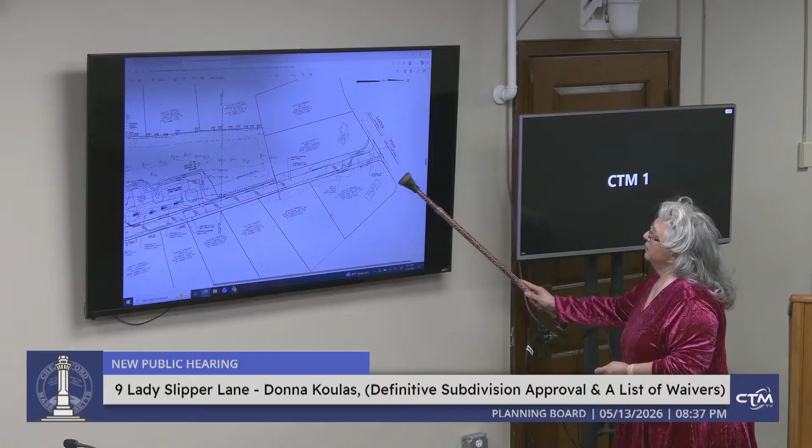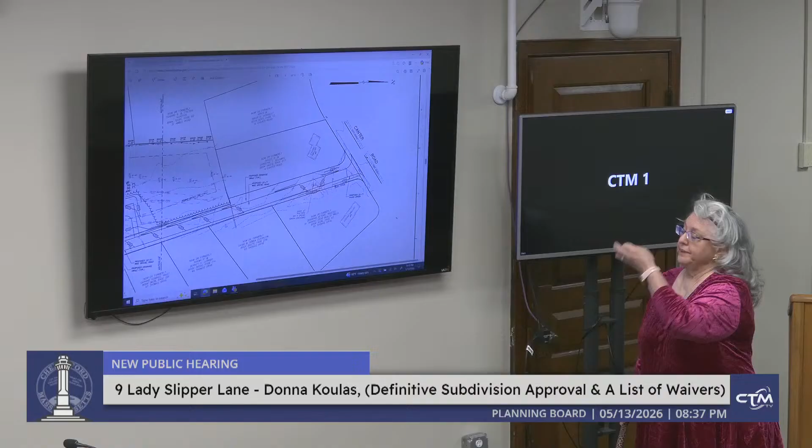If you want to go down to Thomas Drive, I can show you. There's only a little bit of fence here. So if they take all of the trees and the vegetation, I'll be looking in my backyard at a paper street with people going back and forth. It's also a private nuisance because it's going to attract other people. We have motorcyclists that go up and down Canter Road all the time, so they're going to go running around through there too, and they will probably go to the other side, to Chestnut Hill Road, which empties into Pine Hill Road.

Basically, it's not logical to destroy the environment. It's a quiet paper street. There are cumulative negative impacts on the abutter properties. There's loss of natural screening. There'll be increased traffic—it's not just going to be the applicant's residents, it's going to attract attention. And it's a private nuisance, interference with the use of a home via water trespass. I appreciate the opportunity to speak and ask that the abutters' concerns be fully addressed. Thank you very much.

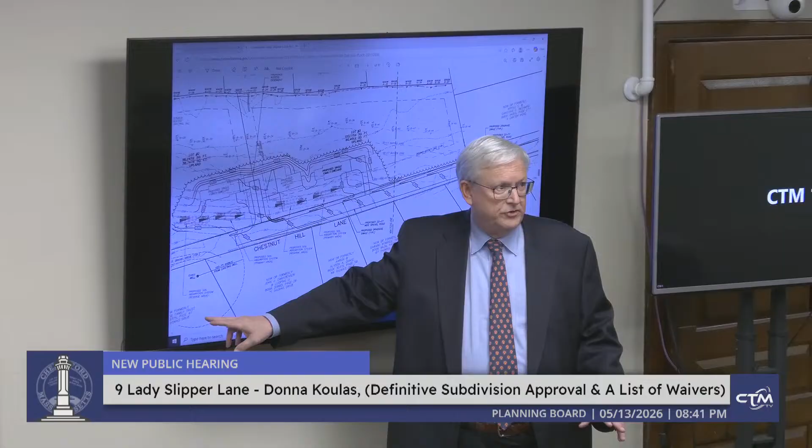My clients have spoken to the White Houses, which are right here. They're not here and they have no objection to it. So I certainly understand Mr. Christensen can make whatever comments he wants about his property, and we respect that. He should not be representing what the comments are for White House Family Trust. As far as I'm aware, they're fully supportive of this entire proposal. So if they're not, they'll come, but I'm fairly confident they won't. So we will address that particular issue for Mr. Christensen. Thank you very much.

Hi, I wanted to also ask one question regarding 61 Thomas Drive, noting there were some comments by Oxbow Associates. I feel like that area, the letter was misrepresented. 61 Thomas is only mentioned once in that peer review letter as it relates to a dip in topography. Nothing regarding clearing or screening or environmental impacts. Okay, thank you. Can we get a copy of the letter?

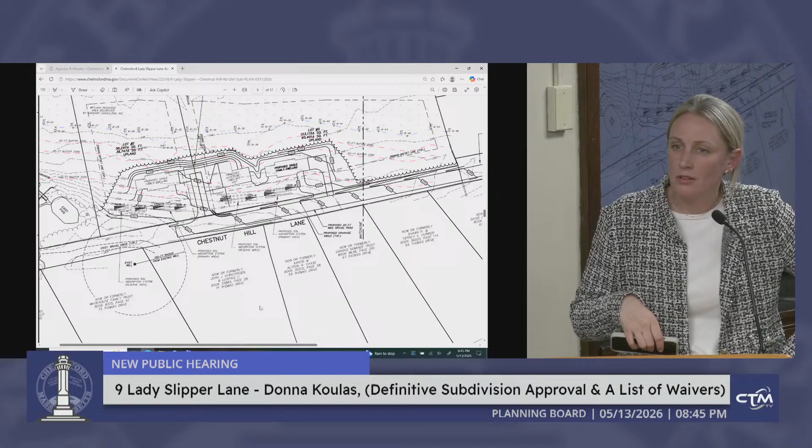Okay, that's super helpful. Last question - some questions came up at Conservation Commission about a potentially perennial stream that would change the boundaries, switching from 100 to 200 feet. So issues around the septic tank and house boundaries could be put into question. Does that overlap? No, that's all Conservation Commission, or Board of Health. So the Board of Health would need to see that, which is a separate hearing.

Thank you so much. Yes.

Anything else from the board? Anything else from the public? Anything else from the applicant? I will take a motion.

I move that we continue this hearing to May 27th. Motion by Mike, seconded by Marcy. All in favor? Aye. Unanimous. It is continued to May 27th. Thank you, everyone.

All right, we will now move to the next item on the agenda. No more public hearings for this evening. Community Development Director's Report.

Just quickly, I have one item. Folks, we may want to hold on a meeting minute, give them a couple minutes - we need to continue the meeting. Could you take the conversations out to the hall, please? Thank you. Just give them a couple minutes. Hold on, Evan, just give him a minute.

Okay, so the one item is the Managed Growth Strategies meeting tomorrow night. At that meeting, NMCOG and I will be providing several updates, one of which is submission of the second state grant with a submission date of June 3rd. That would cover the second $100,000 for the estimated budget. So that's all I have this evening.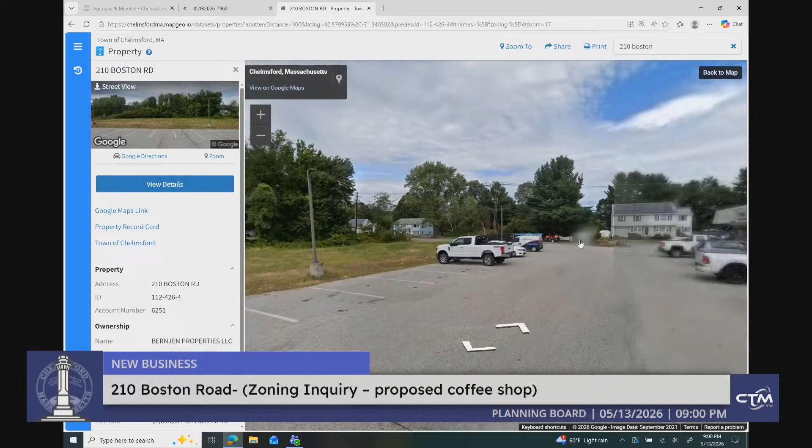Surprisingly, the CA zoning does not allow restaurants of any type. So I told them to send an email to me, and I would bring it to the attention of the planning board for consideration.

Some of the other material you see here is that there's 4 CA areas in town: Chelmsford Street across from the Westlands, which is primarily a commercial area; School Street, a mixed-use area; Kate's Corner, which has some CA; and then the 4th CA area is this Boston Road area.

So at a high level, some of those areas may be appropriate for small coffee shops, not full-blown sit-down restaurants, and others may not. But similar to the Mill property owner, this is another example where a property owner is receiving inquiries and trying to engage with the planning board. So if you want, we could invite them in for a more detailed conversation, or proceed as the board would like.

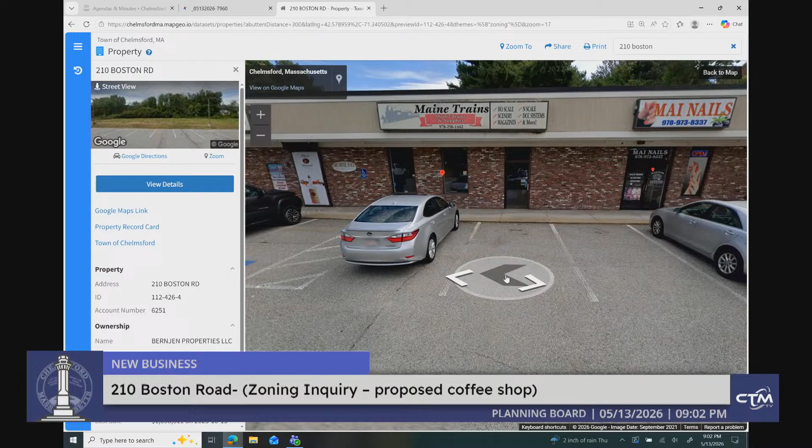Change the use table to allow these small type coffee shops - we'd have to define it. Because the way we've defined restaurants is not based on size or what they serve. Like fast casual, that kept coming up. So we would have to essentially create a definition. And because there's already a pizza shop here, I'm not sure we would want to limit it to only coffee.

So we'd have to redefine what we want and either allow it in the CA zones, or create a new zone, or change it to another zone - like CB maybe, I don't know if there's a more applicable one. It's literally only 4 places in town that we have CA, and one of them is Kate's Corner, which we just rezoned.

Wait, so is that darker area all CA? Yes, this is the lumberyard. These are probably part of the lumberyard, these 3 buildings. Where is this? Chelmsford Lumber, across the street. And what's the green thing? Is that public? Yes.

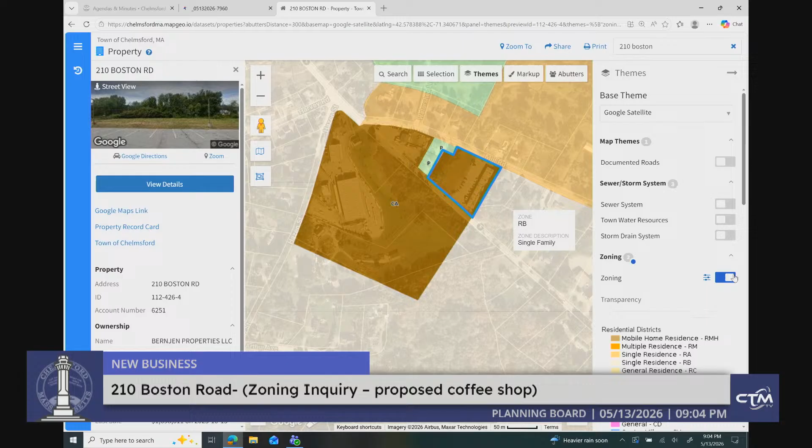The question I had is about the School Street area - I'm not familiar with that CA area. It's very small. The mixed use looked like single family with maybe some contracting in the back.

And then final comment is, while we don't have subcategories of restaurant, we do have subcategories for retail stores - for instance, less than 3,000 square feet, or more than 3,000 square feet. So there's a variety of ways: you could do size, or not to exceed a number of seats or tables.

Where's a gas station now, and what zoning? Gas stations are CB. I was just thinking, because gas stations have... coffee. Yeah, but this is not CA, it's not the primary use.

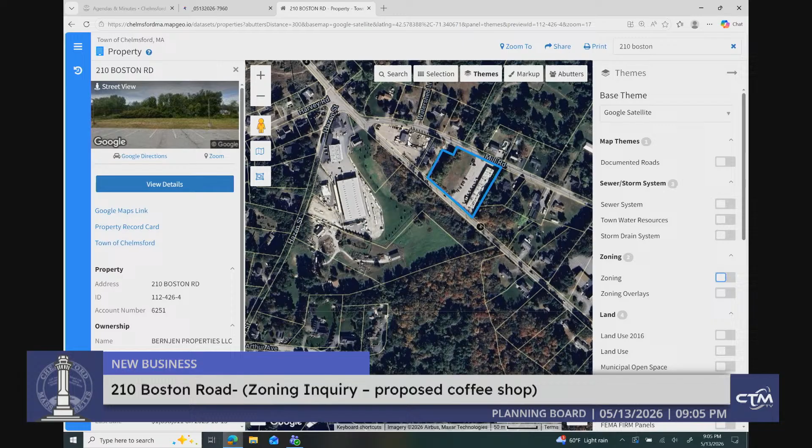Is there other stuff like that? Gas stations usually have a convenience store, and the convenience store has a food counter. And convenience stores are CB, retail. But the principal use of those sites is a gas station, which we regulate.

So I think we have two things here. I don't think there's much we can tell the property owner now at this point. But if we're going to do something for town meeting, we should discuss what we would want to do. So think about it between now and the next meeting. We'll put it on the agenda for some brainstorming next meeting.

I think it makes sense to regulate restaurants based on size. That's going to have significant impacts across town, though, so we do have to think carefully about that one.

Well, maybe, if you're putting, like, what's the one by Robert's Field? The Creamery. What's that zoned? I don't know offhand. Do we know the address? No, I have no idea. Old Westford Road, it's next to the new fire station. Isn't it hit into School Street too? Yeah, it connects to School Street. Here it is, right by Friendship Park. Oh, North Chelmsford, yeah, RB. Well, that doesn't help us. That makes a lot of sense.

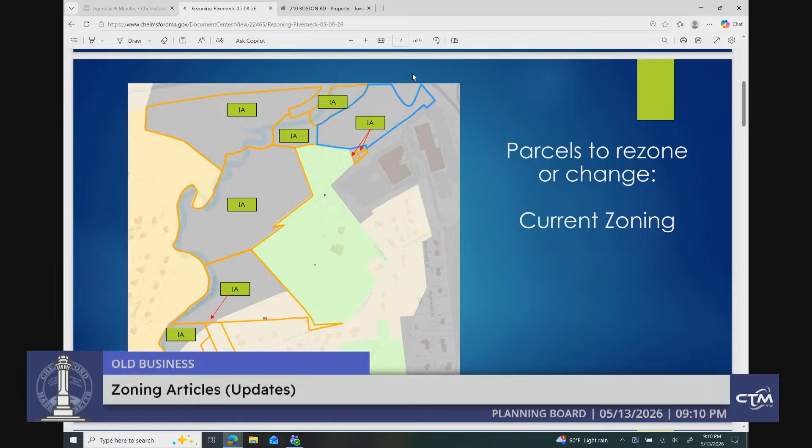The gray is currently IA, which doesn't make sense. What's above it? Is the gray above it also IA? Yes, 495 right on top. You can't really see, but all of those properties are town of Chelmsford. Is it 3? No, 495. That's 495. Route 3 is to the right, further this way.

Is it possible to get some sort of picture added in here that gives a bigger view? No, you can't fit it on a slide. You'd have to, like, not put these in to see the changes, but something like an overview one that says, okay, we're gonna look at this section.

Oh, that's a good idea. I can do that, yeah. Okay, definitely do that. That way we can orient, just so we're serious, those of us who live there. Yeah, don't need it, but that's okay.

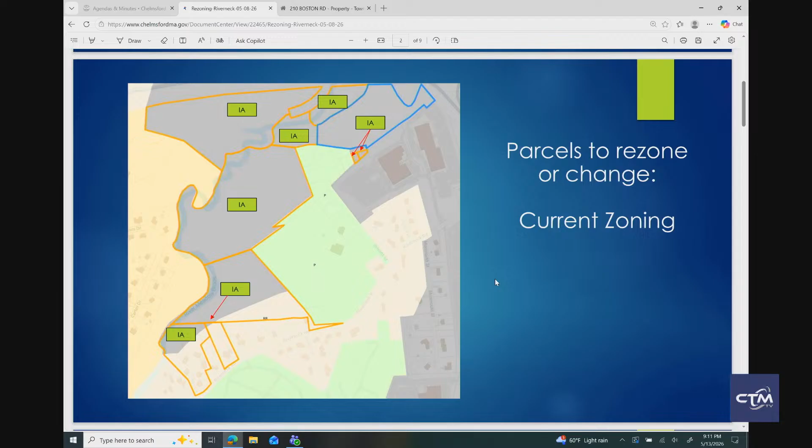It's got the lightning bolt to the right. That's this one, 243. That's 243 right there, Riverneck. Oh, this piece right here, 243. Ah, okay.

So we had talked once before, and we never did anything about it, but one other iteration of this process we had proposed as a policy, which maybe doesn't make sense now that we're doing what we're doing, but I'm just gonna put it back out there, that people whose property is like half one thing, half another, could choose one. I thought you were picking the best. No, that wouldn't make sense. You're right, okay, that's fine.

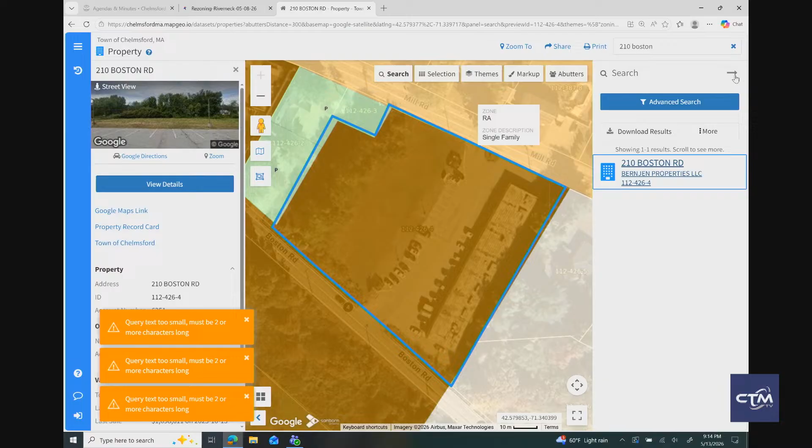Evan, to the left of those properties, that curved shape, the yellow, the brook. On the other side of that brook, if you look at the map and blow it up, it's still IA, there's still an IA strip on the other side of that brook on that residential section. To the left of Collins?

Yeah, see, like, right there? I didn't highlight it. So if you include that one too. Right there? Huh, look at that.

What are we looking at? If you pull up the slide, I can point to it, might be easier. He's doing the map. Which one? The little strip, I think she's talking about. River Meadow, like there's a little bit here. Right there, right over there. See how it is?

The other colored side, outside the lines, yeah, it didn't follow the property. What about the bottom part? The bottom part sticks out too, a little bit. Yep, like my point, okay.

The next piece of this, the famous one, everybody should be familiar with because I think we've spent quite a bit of time on this planning board looking at this piece. Everybody wasn't here then.

Monmouth, we've got McFarland, we've got the Mercury Building. We also have Apollo Drive. Well, Apollo Drive maybe could be IA. And then we have some piece off of Progress here.

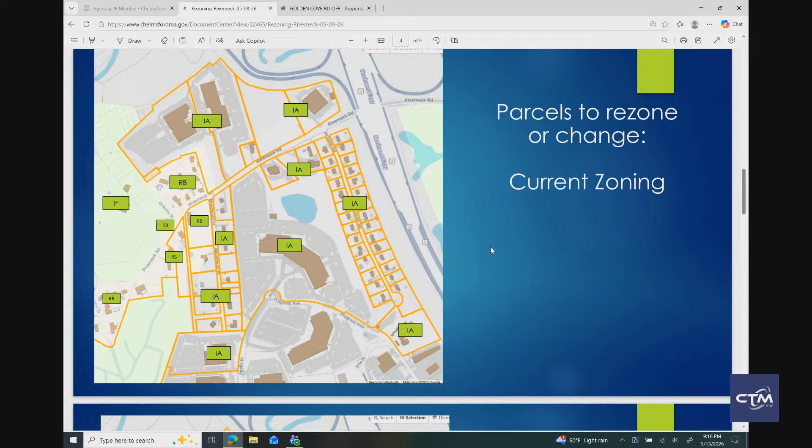So what we're proposing is turning McFarland back, Monmouth back to RB, CB Light for Mercury, CB Light across the way there in the empty lot, and then there's a machine shop, high-tech machineries, CB Light for anything that abuts a residential.

And again, what they have now is already allowed in CB Light, doesn't change anything, but it does prevent anything that would be IA creep, gives us that buffer to the neighborhood. What happens like with all that gray to the right of the RB houses?

What is that? Route 3. Yeah, highway right of way. To the right, that line there, yeah, that's Route 3. So it doesn't matter what we zone that, it doesn't matter for like that, whatever that is, space between. We're not gonna build there.

Actually, no, I think that's owned by the state. The state. The only thing they can build there is if they decide to expand Route 3 again. Okay.

Before we go on to the next slide, I have a question about the residential house on Riverneck. In the middle? Yeah. According to Sean Campbell's letter, there's someone living in there now.

Is there? Which one? Well, that was the one that they- I thought they sold it. The owners sold it to Davis, to Mercury, or to Buckley and his crew. So if that's the house that was part of the contractor proposal, yeah. Well, is somebody living in it now? There's nothing preventing them from using it as single family.

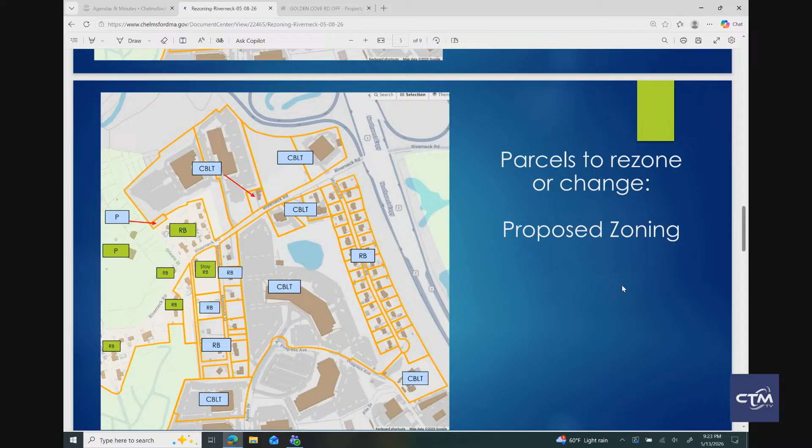So I guess on this one, you're going to come back with what it could look like with what you're proposing.

So you want to remove commercial zoning? For these that have houses already on them, like this one and this one - this is the 5-acre vacant piece. That could be a nice development, 5 acres. You can keep it CB light and keep the overlay on it that would allow residential. You've got to see what else the overlay allows, that's the problem. We looked at that, and it allowed a whole bunch of other stuff that you probably wouldn't want.

Which overlay? The SEOD? That doesn't change the use table. No, sorry, it's the 129. Right, the 129, but the overlay - the SEOD you could keep. The 129 overlay doesn't even apply to Riverneck Road. Yes, it does, I think. Only for multifamily.

Not the zoning, okay, not the GIS - business amenities, I think it does. That was the problem. I don't think so. I think the business amenities are along the main road. That's what I thought - I think that was the whole problem we were alerted to when those people bought those properties, we were like, whoa. If you turn on the GIS overlay, it goes all the way up there, but only certain parts of the 129 overlay are applicable to this area.

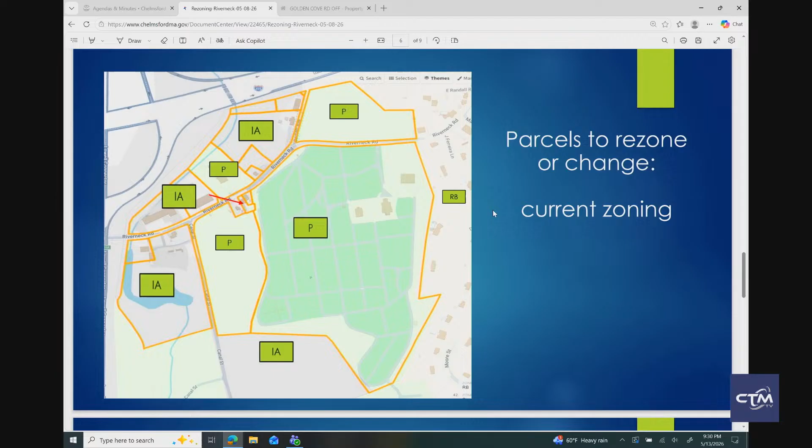All IA, yeah. And one of these actually, I think the town owns - go to the next slide. These up here are IA, so any place where I put RB is where homes are. The P that stays P is where the fire station is. CB Light is where there are actually office buildings that fall under it.

CB Light, where's that? That teeny tiny square - oh, now I got it, under and to the right of the P that stays, underneath RB. What's that tiny thing right there? Which one? That very small square - those are two houses. Where are we talking right here? Those are two houses, okay.

So that's RB as well. That little square with the little thing, that's not a house, that's the Pigeon Club. Oh, that's the Pigeon Club, yeah. We have a pigeon club on Riverneck Road.

What is it gonna be zoned as? What is the pigeon club zoned as? IA right now. So what do you want it to be? I don't know, like RB? Does RB allow pigeons? I don't think anything allows pigeons, I think it's grandfathered in. I don't think we have a zone for that.

There's no pigeons there, it's just a pigeon club. We need like an overlay. They have an outing maybe once or twice a year, you see, they bring their pigeons. Cars and cars, they bring pigeons there. Yeah, there are trailers there all the time. I didn't know they brought pigeons there. So it's like a fraternal club. Yes, yes.

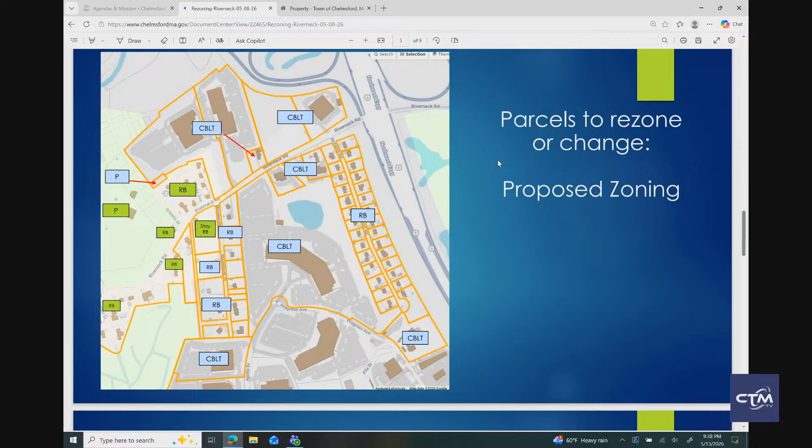All right, Anita, could you make a few changes to the slides? The overview slide, and then also include those other few properties on this one. Yep, and then clean up the labeling. Thank you very much, it's a lot of work.

Do we want to start the informal discussions with property owners next meeting? Why not. Evan, do we have time to get notifications out? We do, it will probably be about a week's notification. Chelmsford Mail is really slow for whatever reason. Do you want to wait, do it in the first June meeting? I think you might want to push it out a month, because one week's not enough. Let's do June 10th.

Okay, property owner invite. All right, so let's go back. We don't have any updates on managed growth strategy. No, I'd suggest we defer that because we have a meeting tomorrow on it. Got it, okay, we will defer that one.